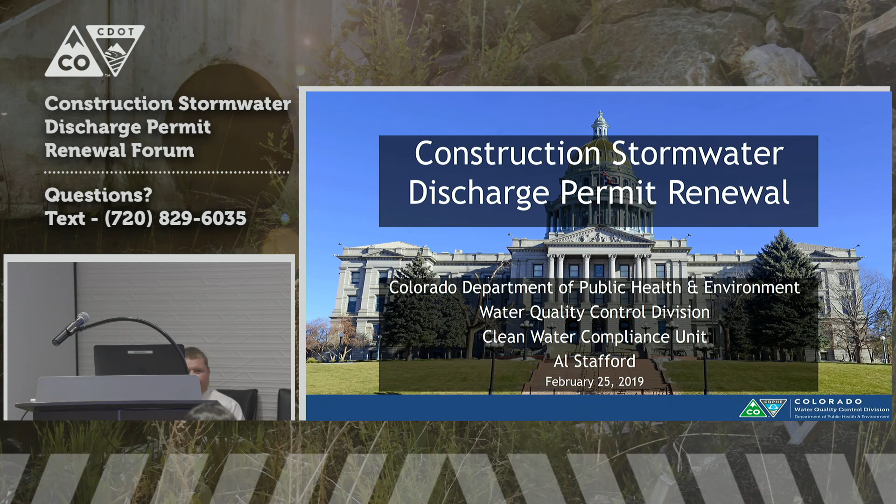Just really quickly, because this presentation is tailored to CDOT a little bit, I think it'd be really important to introduce some key roles in our construction program. So our newest addition is Laura Newman. I don't know if you want to wave... She is our MS4 program manager. Would that be the most appropriate title? Okay, cool. Construction program manager.

And then we have Paul Heffernan. Paul? He knew he was going to get introduced. Very well.

So Paul is our MS4 field, construction program field manager. He plays a key role, and he's going to be dealing a lot with the permit renewal as well. And then we have our water quality section manager, Jean Cordova. She is our subject matter expert. So along with those three wonderful people and Al, we can probably get through this process together. But I thought those introductions were important.

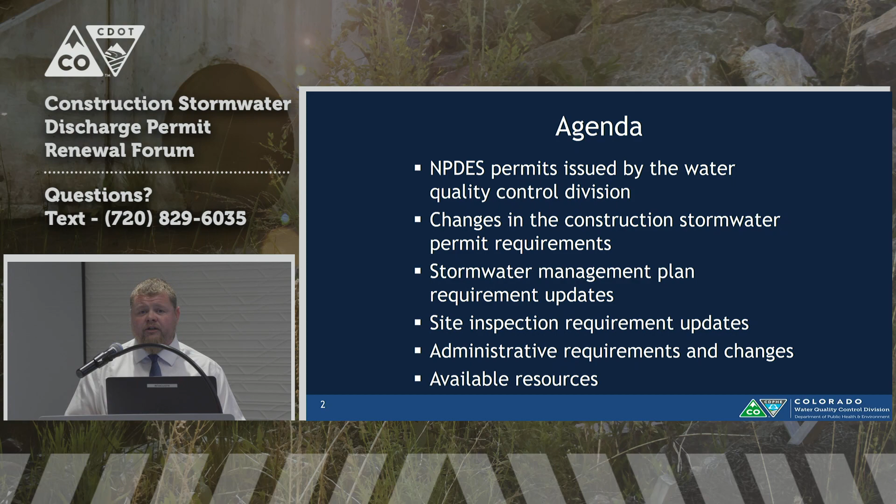So construction permits, what do we have here in the state? As you can see, our construction stormwater permit is by and large our largest permit throughout the entire CDPHE's permits, throughout the Water Quality Control Division's permits. Our next largest number of permits fall under our industrial stormwater permit, which only has about 1,000 permits. So you can see that construction stormwater permit is about 5-fold from even our next largest sector.

We have about 4,800 permits currently in the state under our construction stormwater permit, and we get about 2,400 applications per year. So you can see it's a large volume of permits coming in and out all the time. Also under our construction, though we won't be talking about it as much today, is our dewatering permit. We currently have about 250 of those, with about 230 applications coming in a year.

So those are definitely high turnover projects. They tend to only be when a site needs to dewater for a small amount of time. Our remediation permits tend to stick around a little bit longer. Those are typically down here in the Denver metro area. That's when your groundwater that you're having to pump out meets or exceeds certain water quality standards.

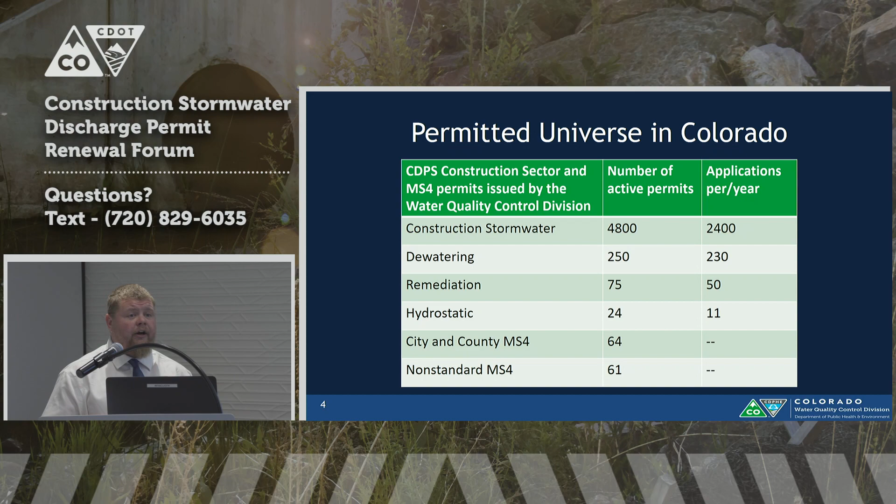We also have our city and county MS4s. We've got about 64 of those right now. That would be such as City of Denver, Weld County, things like that. And then also our non-standard MS4s, that would include CDOT, as well as our universities, things such as that.

So how do construction permits work? How do they work down the chain in the Water Quality Control Division? Well, we start out with our permit section. The permit section writes all of the permits and issues all the certifications that come underneath those permits. So they're the folks you deal with in the application process, modifications, transfers, things such as that. That all falls underneath our permit section.

Then, once the permit's issued, we move on over to our compliance and enforcement section. Now this is actually broken down into two different groups so that we always have a check and balance between compliance and enforcement - there's always other folks looking at these inspection reports. So the compliance unit, which is what I'm a part of, the Clean Water Compliance Unit, we conduct inspections throughout the state and also do assistance in education, such as this project here, and help out with trainings at Red Rocks Community College, and also give a number of presentations when they're requested throughout the year.

We currently have about 9 FTE, and about 80% of that is dedicated to construction. So you can see that we have a large percentage that we really do focus on construction. Part of that is because of the large number of permits, and then also because of our alternative compliance strategy, where we actually have a 10% oversight for the construction sector, whereas many of our other sectors have more of a 2 to 3% oversight.

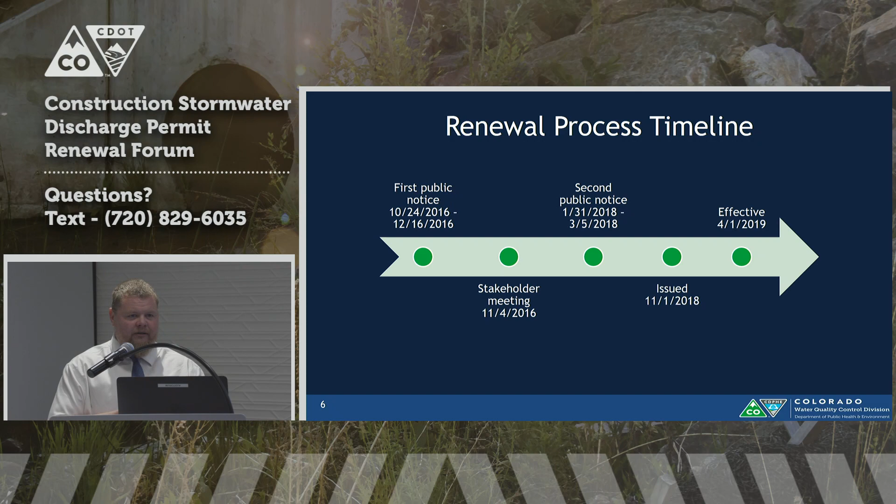Just to take a look at the overall goal of the permit, here's the big thing. The overall goal of the permit hasn't changed. At the end of the day, we're still making sure that we protect our pollutant sources that are associated with construction activity and make sure that we're not discharging pollutants off-site.

We're doing that via stormwater management plan, doing it via practice-based effluent limitations. So instead of taking a sample and having numeric effluent limitations like we do for our dewatering, instead we're using practice-based effluent limitations. So it's practices that we need to do on site.

And so at the end of the day, that hasn't changed. We're still doing the same thing. We're still going to be using silt fence. We're still going to use straw wattle. At the end of the day, management of the site has not changed.

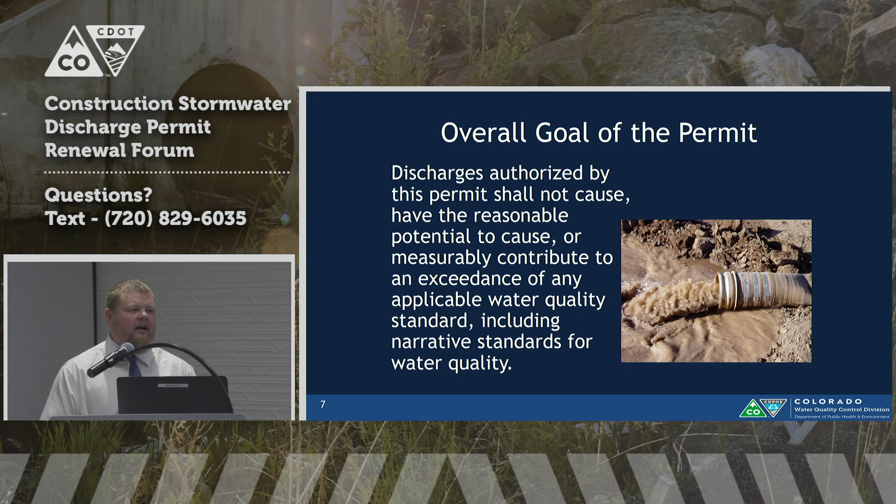So let's talk about now what has changed. A few comprehensive changes to talk about first off. First of all, there is a new permit number, so new permit ID.

That means that everyone will get a new certification, and your certification number, instead of starting with COR 03, will now start with COR 40. The only thing there is we ran out of numbers. There was too much construction.

There is a reformatting of the permit. So you'll see as you read through it—I guess I should ask instead: has anyone read the permit? The new permit? A handful? Excellent, that's better than I've seen at my other trainings.

Way to go, CDOT. So you'll see there's a bit of a reformatting in the permit, trying to get it a little more comprehensive, a little more understandable, putting the requirements that go together. There used to be 4 different places, 5 different places where it talked about concrete washout. Now all of that is in one location.

We've also gone ahead and removed any duplicative requirements. The main one here is going to be our discharges to construction dewatering discharges to the ground. And we'll talk about that in just a couple slides here.

Also, we're making sure, like I was talking about, we're incorporating all those federal effluent limitation guidelines, those ELGs, those things from the EPA that we have to put into our permit.

You'll also notice a terminology change. So where we used to see BMP, or best management practice, now we're using the term control measure. Control measure is kind of a larger umbrella term for BMP. It really makes sure that it includes all of the various ways that we manage stormwater on site—so our scheduling, our education training, as well as our kind of traditional structural control measures.

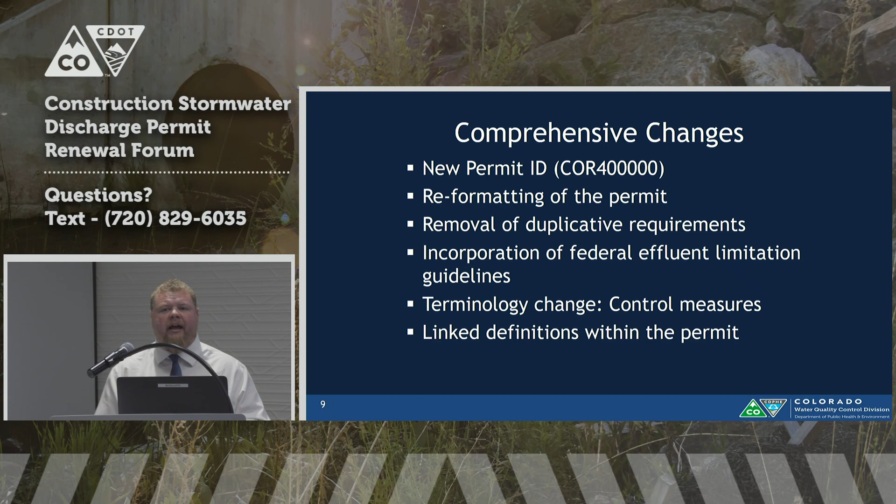Last thing to note here too, this is just kind of neat. So if you're reading through the permit on a computer, the first time that any of our main definitions come up, they'll be in blue text, and you can click on those and it'll pop you down to the glossary for the permit, which is just super helpful, not having to shuffle back and forth. New technology.

So at the end of the day, coverage under the permit hasn't really changed. We're still covering construction activity under the permit. We're still covering those support activities, your borrow and fill sites that are associated with that facility, the dedicated asphalt and concrete batch plants that are associated with that facility.

We've also made sure now to include our masonry mixing sites, which have always been included more or less. They are known pollutant sources on construction sites. It just wasn't specified in the permit previously, so it's really just for clarity there.

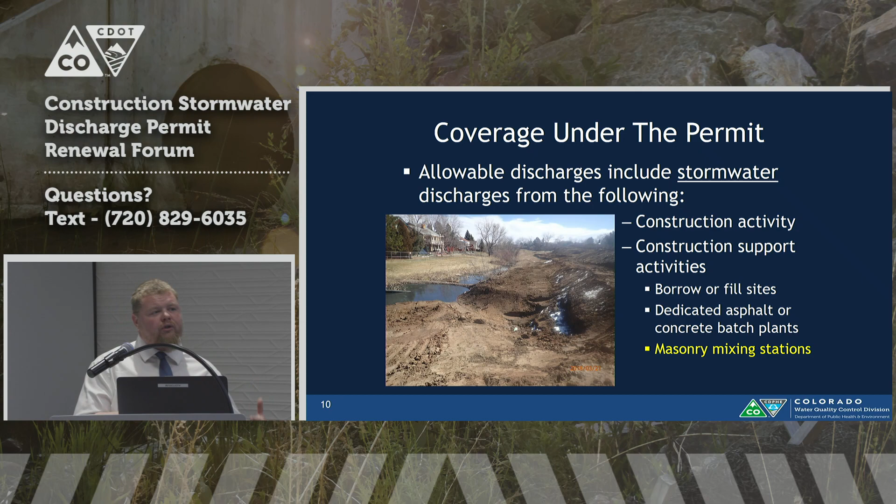Keep in mind too that this also includes all of our construction at oil and gas operations. They do fall under our construction permit during that construction period, and then also includes various mines or other industrial facilities that are having construction occurring outside of their typical industrial activity. Let's say a sand and gravel mine is having a new weigh station put in—that would, if it fell under over an acre of disturbance, need both a sand and gravel permit and a construction stormwater permit.

So for control measure requirements, the big change here is our term 'minimize.' We are required to implement control measures, which we had to do before, but now we're going to be minimizing the discharge of pollutants from all potential pollutant sources. The idea here with the term minimize - we know we can't eliminate all sediment from leaving the site. There's always going to be some discharge from the site, so we want to minimize that discharge. And minimize, as you can see from the definition, means we reduce or eliminate to the extent achievable, with control measures that are technologically available and economically practicable in light of best industry practices.

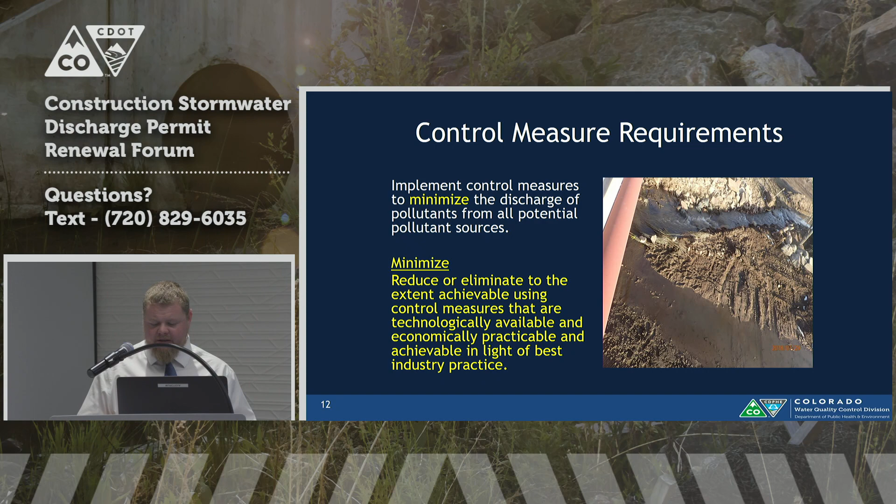So what sorts of things does that mean for construction sites for sediment? Well, it means our silt fence, erosion logs, sediment basins - these same control measures that we're seeing already out there in the field. That's what we use to minimize pollutant sources from construction sites, because that's our current industry best practice.

So from the top one here, this is the old familiar: control measures have to be selected, designed, installed, and maintained in accordance with good engineering, hydrologic, and pollution control practices. Same exact language from the previous permit.

Another thing here is that control measures need to be installed prior to the start of construction or disturbance. This really just provides clarity, right? We always knew we had to implement control measures prior to construction disturbance - otherwise we had construction without control measures, and that wasn't allowed previously. So we're just adding clarity there. We already know, too, in phasing, that we always included that in our phasing descriptions. We always said in our stormwater management plan that we were going to put in control measures prior to construction. Now we're just clarifying it in the permit.

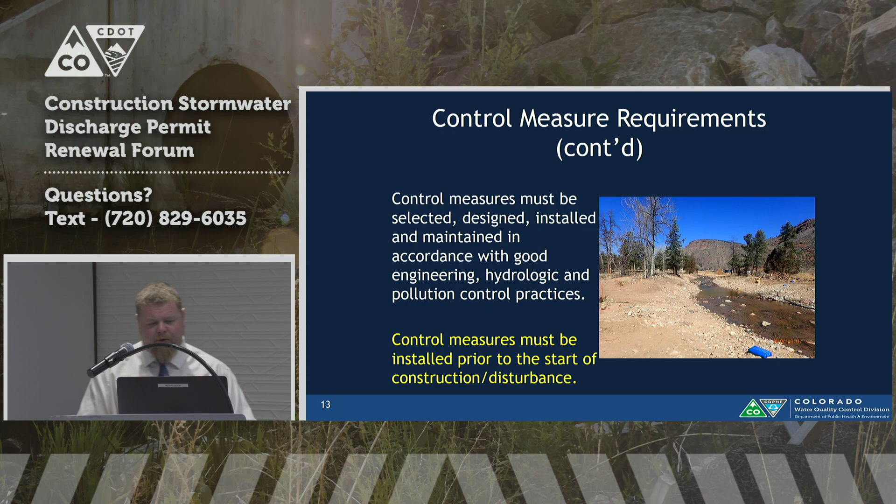A couple more requirements for control measures, specifically for erosion and sediment now. Stormwater runoff must flow to at least one control measure to minimize sediment. Again, this is clarification from previously - we said we have to implement control measures for all pollutant sources, now we're just saying they have to go to at least one control measure.

So our control measures have to be appropriate for the disturbed areas and for the expected flow conditions, and they need to be adequately sized. A couple examples here: first, inlet protection is not appropriate as the sole control measure because it has to be able to bypass - so inlet protection can't be our sole control measure because it's not appropriate. Another example would be our sediment basins - they need to be appropriately and adequately sized for all of the potential flow coming to that site.

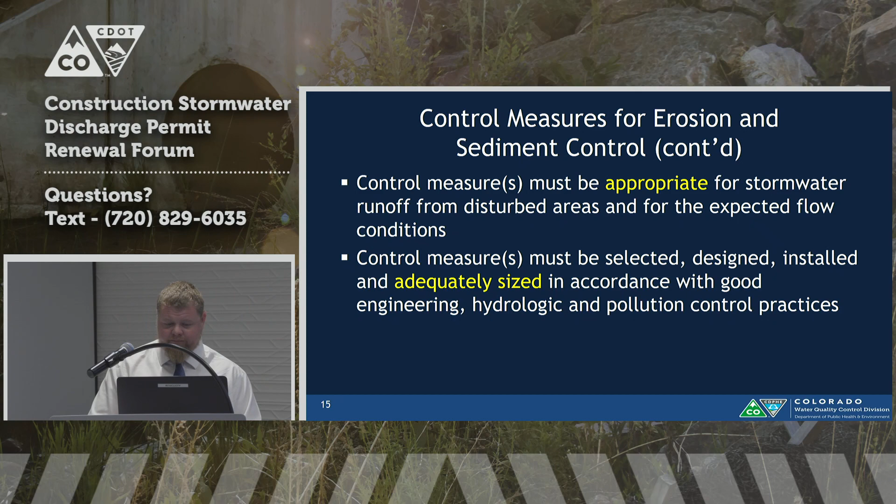Looking at vehicle tracking controls specifically, we already knew we had to implement vehicle tracking controls previously because it was part of our requirements for our stormwater management plan. So it's not actually a change in what we're doing on the site. We know we have to do this. Now it's just in the permit rather than just in our stormwater management plan.

One thing that is different here, though, is that we can ensure that areas where tracking does occur, it flows to one control measure instead of having a vehicle tracking control. So what this is saying here, the change that allows a little more flexibility in the sector, is that we actually can have some amount of tracking as long as it's coming back into a control measure.

Again, though, remember that inlet protection cannot be the sole control measure, including for that tracking. So perhaps it comes back into a lined ditch with check dams, that sort of thing. That's what we're looking at there. Inlet protection cannot be the sole control measure there.

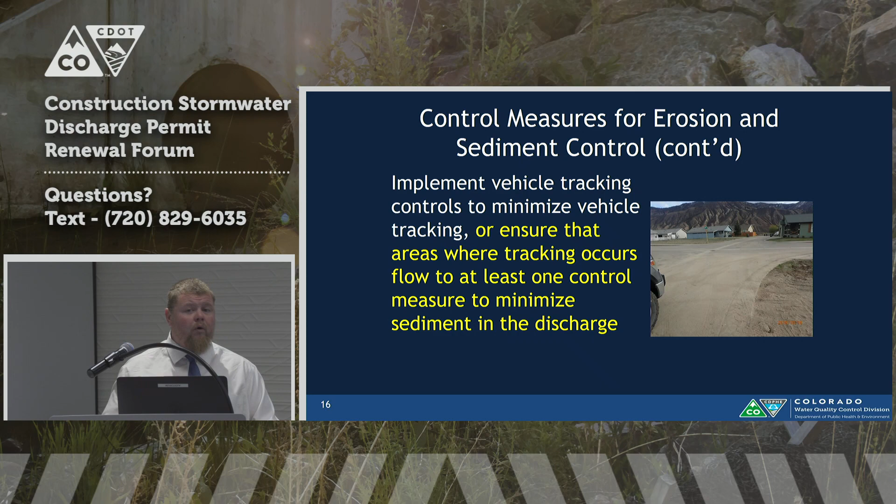Another requirement for our control measures for erosion and sediment control is that for sediment basins, we need to now make sure that our outlets withdraw water from at or near the surface when they're discharging from our basins, from our impoundments. And we'll talk about that word unless infeasible in a second here.

But what does that mean? What does that look like in the field? It could look like a skimmer. Could also look like a slotted riser pipe, perforated pipe, something like that. The idea is that we want that water to be able to build up so that the sediment settles to the bottom and we're not sucking out from the bottom of the basin.

Now again, no actual change here really, because previously we needed to make sure if we were using a sediment basin as our final control measure during the construction activity. We know that sediment basins, water quality ponds, don't need additional control measures once we don't have disturbance. But during the construction phase, we want to make sure that basin is somehow modified. So perhaps there was a concrete trickle pan down the middle of the basin.

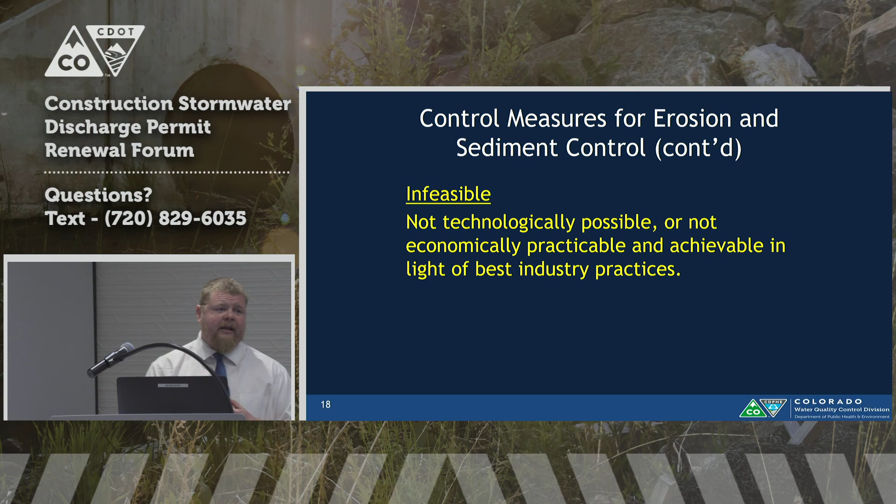So let's go back to this last example here with the skimmer. Now, if in order to have a skimmer, we need to have a generator, we need to have some sort of electricity going to that skimmer, well, in that case, that might not qualify as economically practical in this situation. And so in that particular sediment basin, maybe we want to see that slotted riser pipe or something like that.

Another one of our requirements now for erosion and sediment control is that we have to maintain pre-existing vegetation or equivalent control measures for 50 horizontal feet to the receiving waters. And again, we see that term unless infeasible. Now, this one came directly from the EPA. This is one of those ELGs from them that we were required to implement. Let's talk about what infeasible might mean in this situation. Let's say we're doing stream bank restoration from the 2013 flood.

Well, if we're intentionally disturbing the entire area down to the river, then it's not feasible to maintain that 50-foot buffer. Let's say that we have a site that's already existing today—they've already graded down to the river because this permit isn't active yet. Well, in that case, again, it's not feasible to grow that vegetation back.

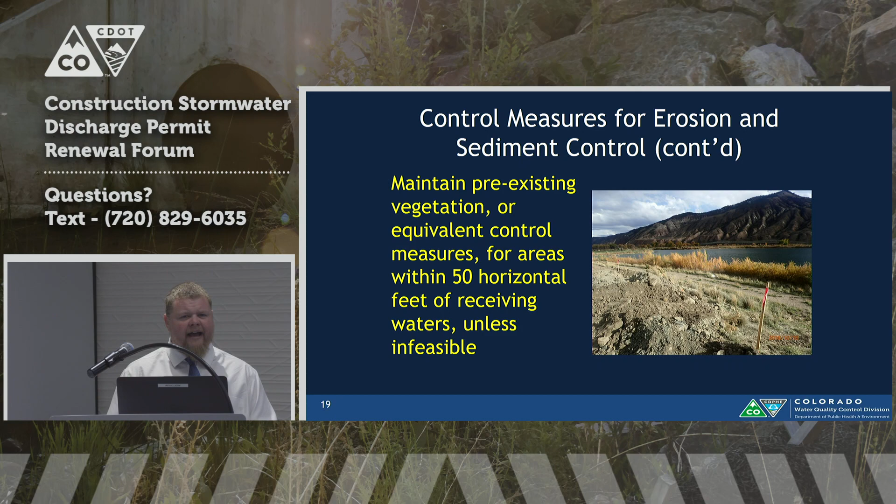It's already happened. It's kind of grandfathered in there. Another instance, let's say that we have a subdivision and we'd lose a certain amount of value if we're not able to grade closer than 50 feet to our receiving water. That might be able to be qualified as being infeasible.

Another one here is minimize soil compaction, where you're going to be using infiltration or where your final stabilization is going to be some sort of vegetation. This one really adds clarity. It is an EPA ELG that was required. It already made a lot of sense and was in a lot of stormwater management plans that we should reduce soil compaction, especially because if we were going to use infiltration and we compact that soil, we're not going to get that infiltration rate anymore. Now the soil's compacted, there's no space for that water to get in.

Also, we've always known that we want to minimize compaction when we're going to be using vegetation as our final stabilization, because if we compact that soil, that root system's not going to be able to get in there. We're not going to get as good a seeding as we would like.

So how do we minimize soil compaction? Well, we minimize site access where possible. So if we know that we're not going to be working in these lots over here or on this stretch of the highway over here for the next 10 days, then we know, okay, let's not drive on it while we don't have to drive on it.

Another one here, unless infeasible, you're going to preserve your topsoil for areas that are going to be vegetated for final stabilization. This was already a requirement, again, in a lot of stormwater management plans. COGCC requires it in the oil and gas field.

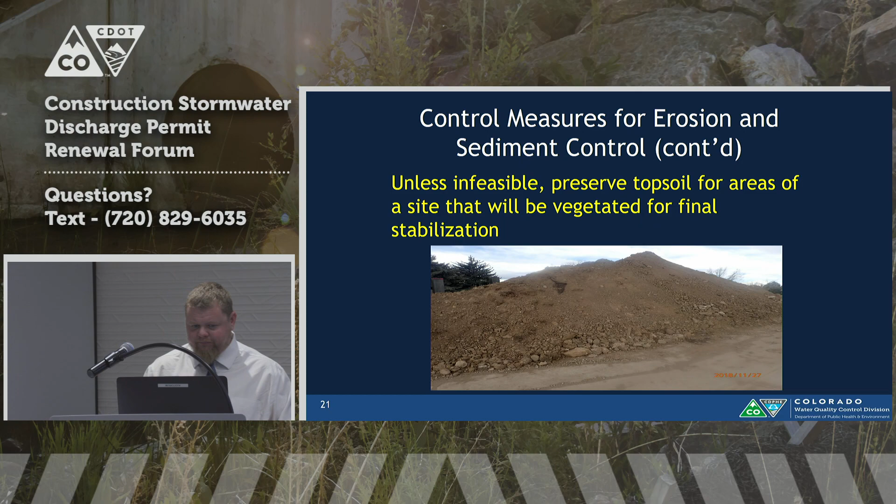Now, what would be infeasible in this situation? Well, let's say we're not going to use topsoil—well, in that case, it's infeasible to keep your topsoil around. Let's say that your topsoil is incredibly rocky or very, very sandy and isn't going to be able to grow the vegetation that you're going to need there. Well, in that case, again, it's infeasible to maintain that topsoil. And this is another one that came from those EPA ELGs.

This one here, I know that CDOT's made some changes to their specifications regarding the amount of soil that can be exposed at any time. I know that CDOT already has some requirements in the amount of acreage that you can have open, and that you need waivers for more of that. So this is in line with that idea there. Again, not really a new requirement—it was already something that was in the majority of stormwater management plans.

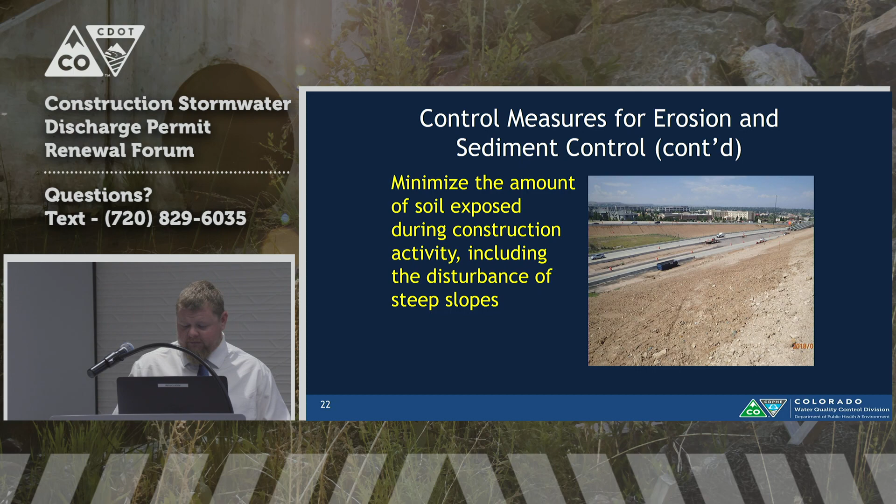How did it look? Well, it looked like phasing. We minimize the amount of disturbance by phasing that project, doing just pieces at a time, and that's going to include especially your steep slopes there. Now, if we're not able to implement phasing, then we're going to look to temporary stabilization. So if we can't break this up so that we're only working on sections in 2-week increments or so, that's when we're going to look into our temporary stabilization. We want to make sure that we're implementing that whenever construction has ceased for at least 14 days.

Tracking is another great temporary stabilization method. Now, some folks say, wait, but you said we can't compact the soil. Well, running a track over at one time is still in line with minimizing your compaction. Another option there would be your surface roughening—grooving, tracking, disking, things like that.

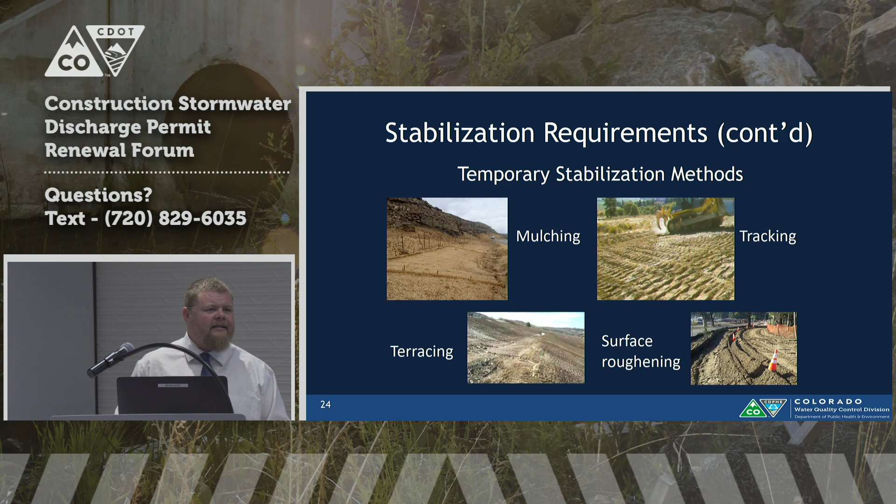Now, getting away from our temporary stabilization over into our final stabilization. Final stabilization has to be installed and designed as a permanent feature. That might be your riprap channels, things like that.

Also, think about rather than a temporary seed mix, which often results in quite a few weeds, we're looking for a permanent seed mix. So more of that native seed mix, what's really going to stay there and last.

Another requirement is we want to make sure we remove all our temporary control measures unless otherwise specified. Obviously, our erosion control blankets, we're not going to rip those out. The point is for the vegetation to grow through those. But we're talking about silt fence, and really that was already a requirement in the permit previously because we only wanted to implement the control measures that were doing something in the field. Otherwise, we needed to be taking those out because we run into waste management issues.

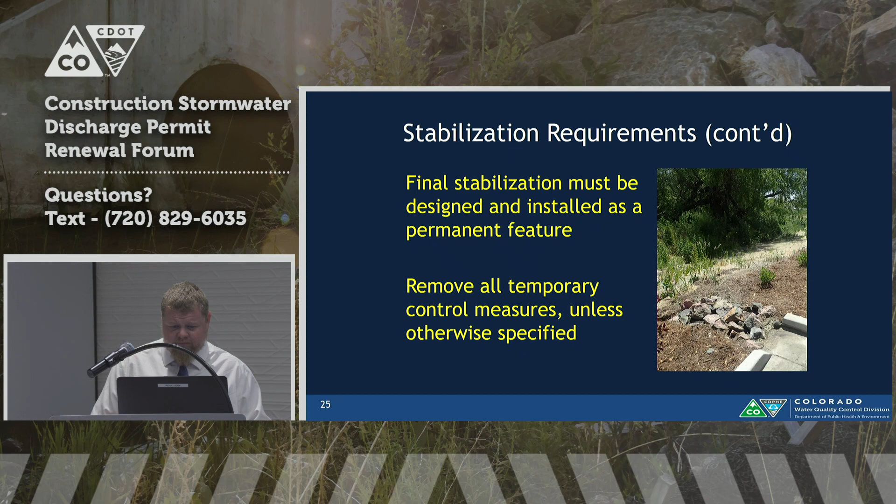Now, our concrete washout areas, this part here hasn't changed at all. We have to implement control measures for concrete washout, and we can't let that concrete washout get to any of our runoff or our receiving waters. So we can't discharge that as stormwater. Now, we can still discharge concrete washout to the ground.

And the previous permit really just said that we had to prevent pollution of groundwater. Wasn't very clear in exactly what that meant. So the renewal here, we have a little more clarity. Discharges have to flow through soil that has a buffering capacity prior to reaching that groundwater.

Now, do we have a definition for buffering capacity? No. I think about it as if you're in a cobbly, sandy soil, that's not going to have as good a buffering capacity as you would in something more loamy. But overall, it's a judgment call.

Concrete washout shall not be located where there's shallow groundwater. Are we defining shallow groundwater? No. But think about it again from a common sense. It's really the same as the previous permit. You know that if you went out there to dig your concrete washout pit 4 feet deep and you hit groundwater, that's shallow groundwater. If you know that you're right next to wetlands or a stream, chances are you have shallow groundwater.

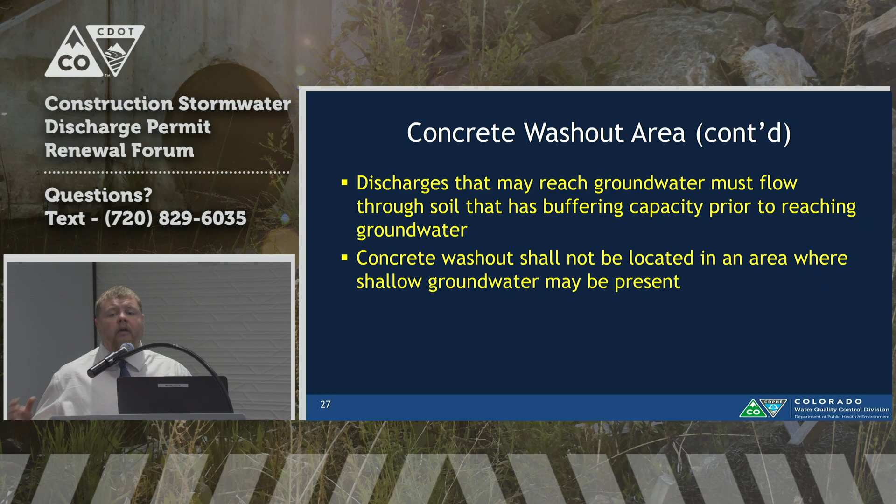You're going to want to move that concrete washout further away. So again, previously we said you had to protect groundwater. Again, now we're just defining a little bit more what that really means.

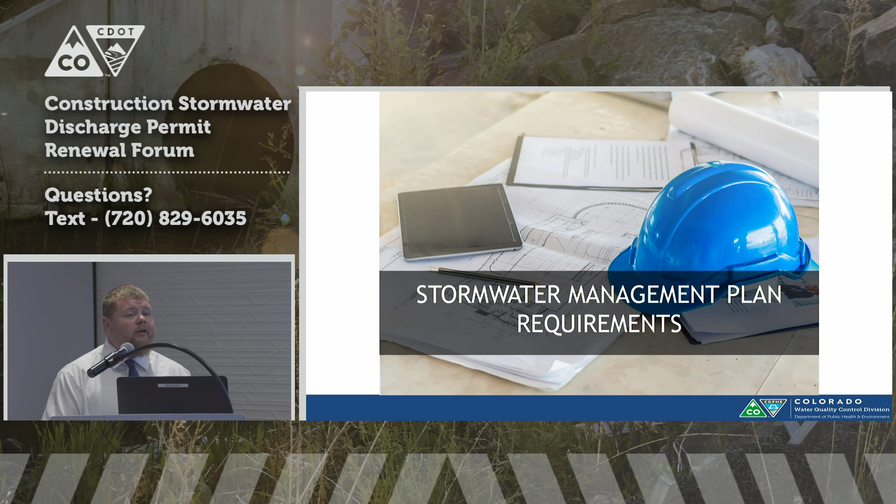So those are our control measure requirements, our practice-based effluent limits that are in the permit. Now we're going to take a look at the documentation. So there's only really a few changes that we have to the stormwater management plan requirements.

First of all, before we get into those changes too much, this is still a living document. We still want it to be maintained, kept up to date. It should reflect exactly the current field conditions. Now we want you also to maintain a record of those changes, and that's going to include a date and the identification of what that change is.

There's two different ways you can do this. The first would be to keep some sort of log in the back of your stormwater management plan. Write down what the change is and the date that that change occurred, and then keep that current stormwater management plan in your book.

The second way would be kind of what we typically see in the field, which is just going through and redlining. But now you're going to add a date to when those red lines occurred. That's how we're going to make sure we know kind of a documentation of the maintenance of this book.

Same as previously, though somewhat misunderstood, the plan does need to be retained on site. If you're unable to retain the plan on site, let's say construction occurred 3 years ago and you're still waiting for the grass to grow out in Rangely, then in that case, that stormwater management plan might not have a place to live on site, but it could live at the local maintenance office.

And so what you just need to do there is get in touch with somebody from water quality, one of the inspectors, one of the permit writers in construction sector, and just have them ask for permission to keep it off site, and we'll send you back a quick authorization, just an email saying that's all set, we'll add this to your file. But we do need that plan to be maintained on site unless you have that written authorization.

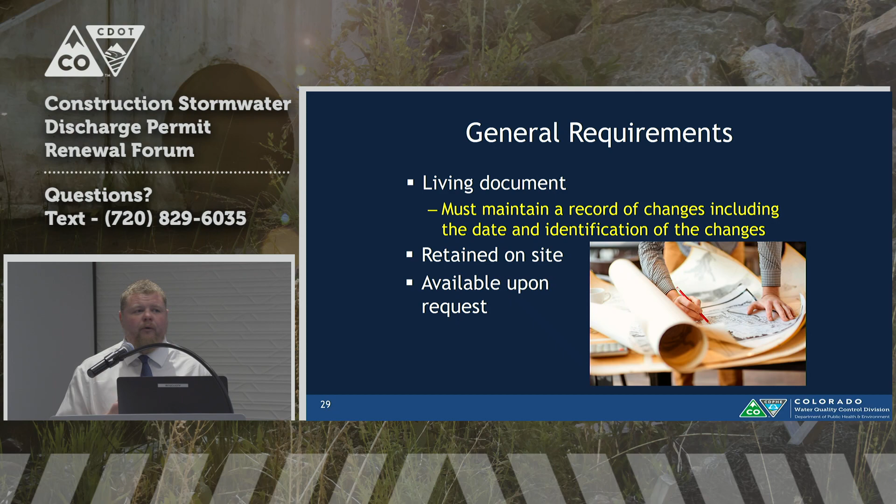And of course, same as before, that plan needs to be available on request. Typically, that would be for inspections, both MS4 inspections as well as the state ones.

So our required content, not too much change right here.

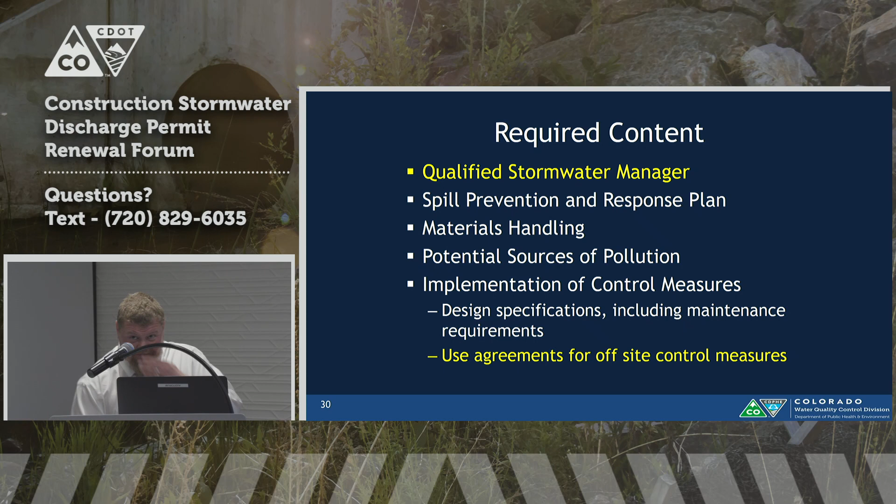One thing that looks very different, but hasn't actually changed, is our qualified stormwater manager. This previously used to be called our stormwater management plan administrator—it's the same idea here. All we're saying is that the person needs to be somewhat knowledgeable in construction stormwater. We're not defining what knowledgeable means, we're not requiring any trainings, we're not saying you have to go to this training or that training. But we are expecting that person has an understanding of how stormwater works and is able to analyze how stormwater management is working in the field, which is essentially what that stormwater management plan administrator previously had to be required to do.

Nothing new with our spill prevention, materials handling—of course we want to list out those potential sources of pollution. When it comes to implementation of control measures, we look at our design specs, including maintenance requirements and descriptions. We also now want a use agreement whenever you have an off-site control measure. Let's say we've got a subdivision with 6 builders all going to the same sediment basin—you'd want a use agreement with whoever's maintaining that basin. Same thing if we've got an inlet down the next intersection from our bridge project—you'd want some sort of use agreement if you're not the permittee taking care of that control measure.

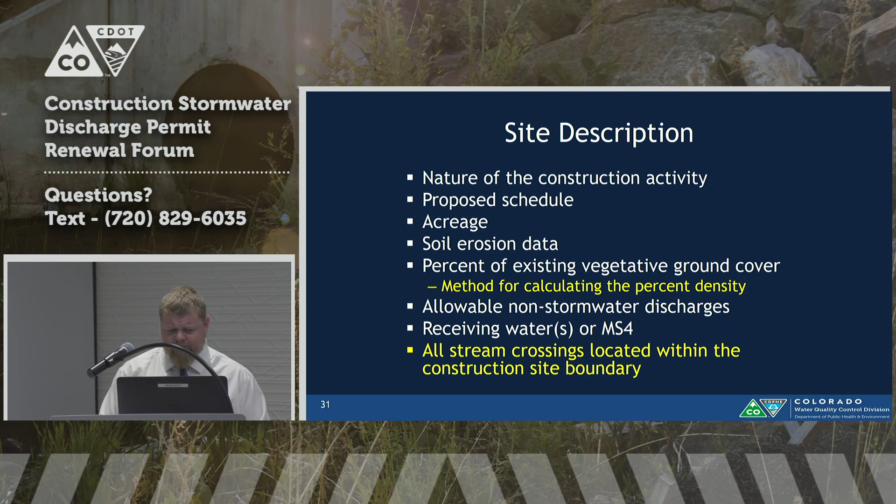On our site map, again, not a lot of updates or changes here. A couple new things—some of these we're already seeing in a lot of our CDOT plans anyway. Flow arrows—we want to get our flow arrows on our maps to give us a better idea of how stormwater is moving on site.

Kind of skipping down to the other changes here—in addition to having all of our waters, our springs, our streams, our wetlands, and labeling where those are, we also want to show any area where we're maintaining that 50-foot setback from construction to the stream. Remember we had talked about that requirement for the EPA—we also want to indicate where that is on our map.

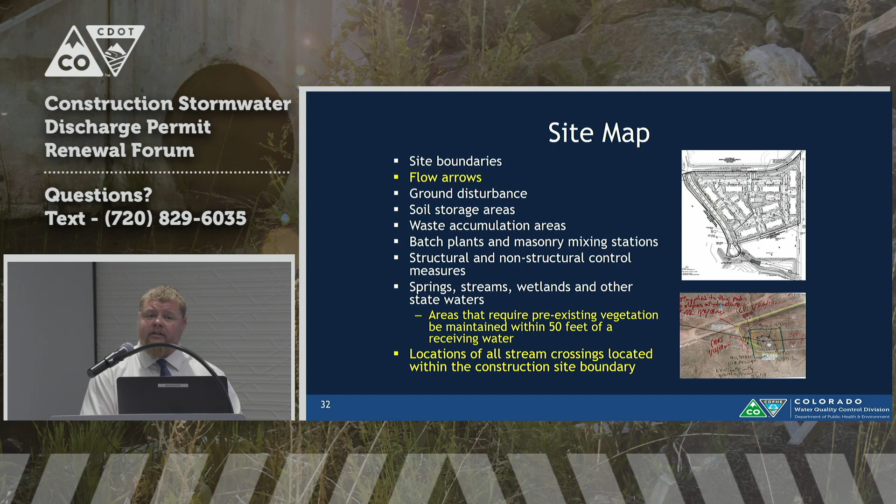We also talked in our narrative about wanting a description of our stream crossings—we're also going to label where those are on our map. The thing about stream crossings and why that's in the permit now is those are really our crucial locations, right? That's where our construction comes right up to the river. We know there's a high potential for discharge without adequate control measures in those locations, so we really want to draw attention to those locations and focus on them in our inspections and in our management of water on the site.

Also within our stormwater management plan, we're going to list out what we're using for final stabilization—we've always had to do that. Always make sure you have your seed mix in there, whatever that's going to be, and it's best to have some sort of percentage in the actual seed mix. If you know it's going to be a native seed mix, maybe include some examples of what might be used in your plan.

As a new addition to the plan, we also want to see the plan practices that are going to be used after construction is completed. So here we're talking about permanent riprap channels, sediment basins that are now water quality ponds, things such as that—that wasn't a requirement of the permit previously. You used to be able to just say basically how you were going to achieve vegetation or non-disturbance. Now we also want to know how stormwater is going to work permanently on the site.

So now we'll switch over to our site inspections. A couple of really great changes in here for sure.

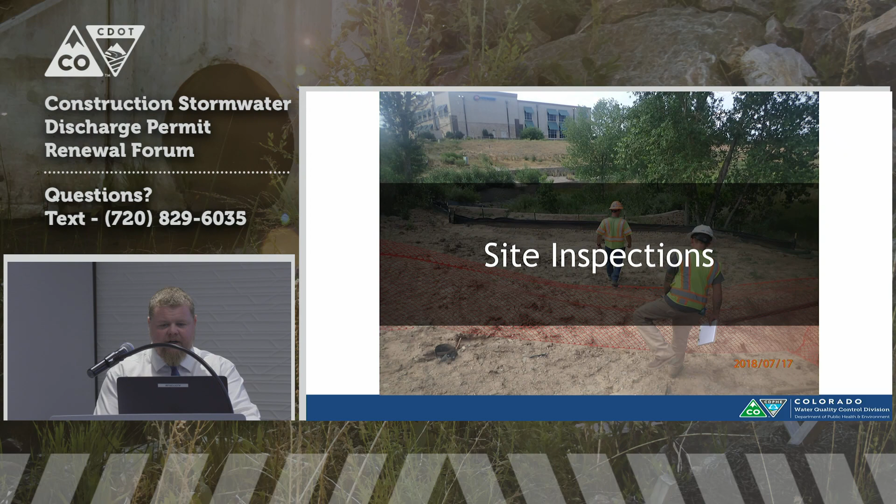One thing is we want to make sure inspections are conducted by a qualified stormwater manager. Now you can have multiple qualified stormwater managers for one site. It can be a title or a person, but you do want a qualified stormwater manager conducting those inspections. This is someone knowledgeable in stormwater, so it makes sense that you'd want someone who knows what they're looking at to be conducting the inspections.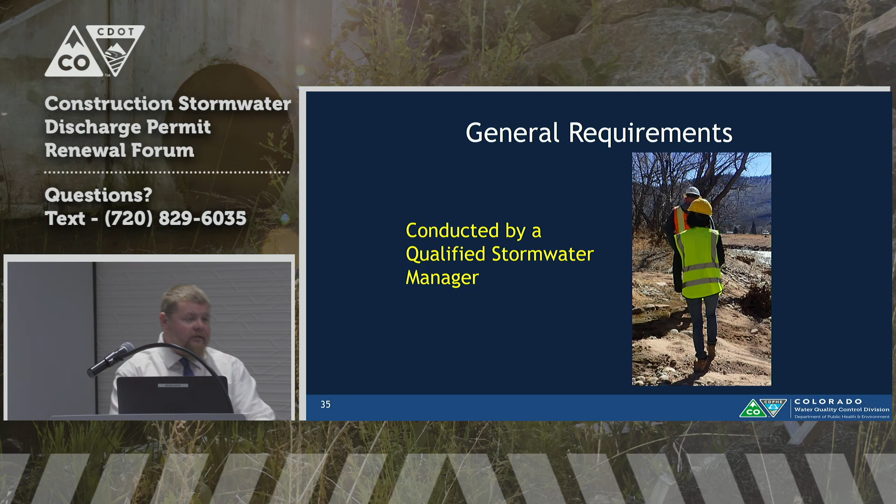One change here is some clarification: the previous permit didn't say when inspections needed to begin on site. Now we're saying you need to start them within the first 7 days. Remember that installing control measures is a form of construction activity, and there's some form of disturbance that occurs. So once we have control measures on site, within those first 7 days, or once construction activity begins - if you began before control measures, which you shouldn't have - you want to start inspections within those first 7 days.

Here's one of the exciting changes in the permit that adds a lot of flexibility. We now have different options for inspection frequency. Our first option, which is new, is that you can conduct site inspections every 7 days and not conduct any post-storm inspections. So that's option one: one inspection every 7 days, no post-storm.

That might work really well in a location where it rains a lot, or if you know you have 20, 30, 40 different sites that you need to inspect and there's no way you can do that when it rains really hard. But if you can get them all on a weekly schedule, it's easier to maintain. So that gives you more flexibility there.

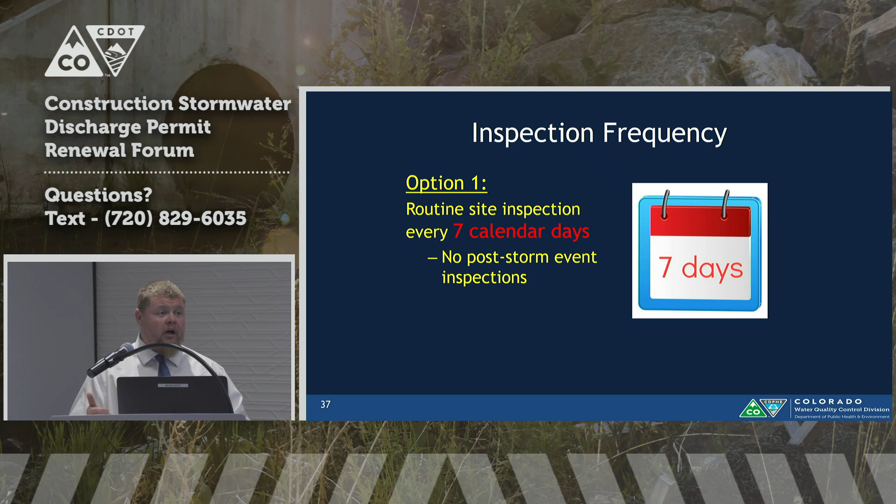Now remember, with our 7 days, stormwater doesn't take holidays, vacations, or weekends. Stormwater happens anytime, so 7 days is strictly 7 calendar days. If you know President's Day is coming up and you usually inspect on Mondays, you're going to want to shift things around to accommodate for that. They need to be at least every 7 days.

Now option number 2 - remember option 1 was 7 days, no post-storm - option 2 is what we currently have in the permit: an inspection every 14 days, plus post-storm inspections. This might work really well in the drier areas of the state, or if you know you have the manpower to get behind the storm events. So you can choose whichever option works best for your site.

You can also choose to go back and forth. Let's say during the rainy season you want to do 7-day inspections, and during the summer or drier season you do every 14 days plus post-storms. So you can make those options to go back and forth between the two. Lots of flexibility there.

Great question, and I'll get to your question back there in a second, Paul. What we will - and we'll see this in a minute - is you want to include that in your inspection records, but it doesn't need to be in your plan itself.

Question back there? Paul Heffernan, I was introduced earlier, I was in the room. Just so everyone knows, CDOT is not changing from 7 days with post-storm. We're not changing with these options. Thank you, Paul.

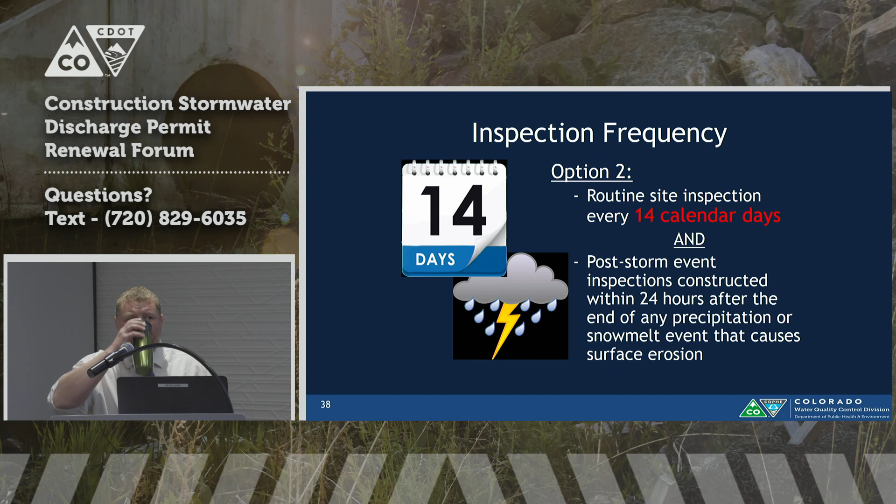That is a great question, and I do not.

Other questions on the inspection frequencies?

You can. You can. You just need to note it in your inspection records, and go forth.

What was that? I'm sorry? Sure, that would be something you'd have to work out between the MS4 and CDOT.

That's true, yep, that's true. And let's say you have one CDOT project and one that's not CDOT - you can do different things within your company too. Yep. Yeah. Yes. Yes. Thank you.

I'm sorry to folks online if you're probably not hearing these questions - my apologies, I will repeat the question. Other questions on the inspection frequency?

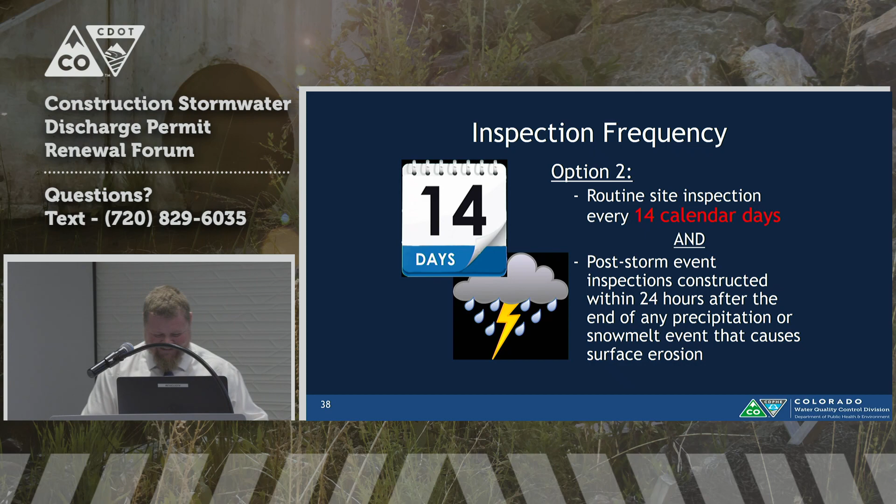Another change here in our inspection frequencies. So if you have a site that's discharging to outstanding waters, and you would know that from the fact sheet that comes with your certification, that site needs to conduct site inspections every 7 calendar days. So you're held to that 7-day schedule. No post-storms, but you are held to the 7-day schedule there.

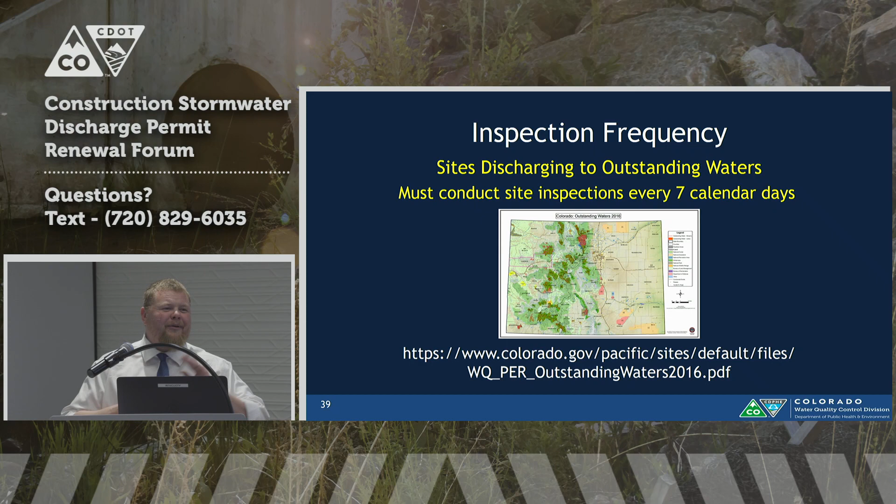And just to touch on that, outstanding waters - if you work primarily here in the metro area, there are none. They're all up in the mountains. They're pristine kind of headwater areas.

So a couple changes to our inspection reports. There's a few new requirements to include within your records. One is going to be your weather conditions at the time of the inspection. This can be real general - we don't need a whole meteorological evaluation of the site. Sunny, cloudy, snowing. Obviously if it's raining that's important to put in there. Snow melt, things like that. An approximate temperature - again, doesn't need to be to the nearest 10th degree. We're just talking approximate here.

We also want you to include your phase of construction. This, again, we aren't necessarily providing the various potential phases - it's really up to you to decide what that means for your site. Things such as active construction, grading, final stabilization, vertical construction, landscaping. Those are the sorts of things we're looking at here.

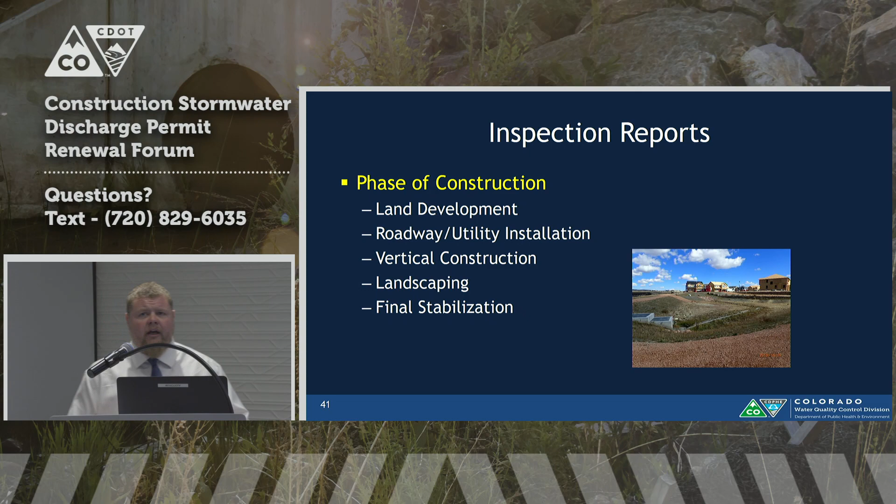We want to see an estimated acreage of disturbance - how much area is currently disturbed, not what you have on your permit, but the actual current disturbance. You're not going to include areas here that have been finally stabilized. So you would include if it's seeded but hasn't grown, if it has erosion control blanket, temporary stabilization, mulching, tracking, things like that. But we're not going to include paved areas, building foundations. Once we've got that road in, we're not going to include that.

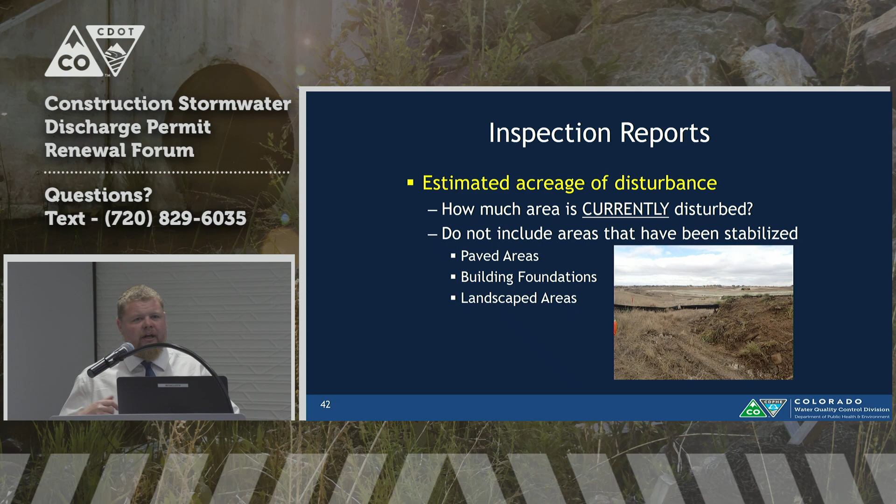And here's where we come back to that previous question. So we want a description of our minimum inspection frequency - whatever we're using at that time, we want to have that included on our records here. And then, same as before, if we're going to deviate from the minimum inspection schedule - our winter exclusion, final stabilization, where you pop down to 30 days - I'm not going to talk more about those since nothing's changed there. Those are exactly the same. So you still want to note that in your reports.

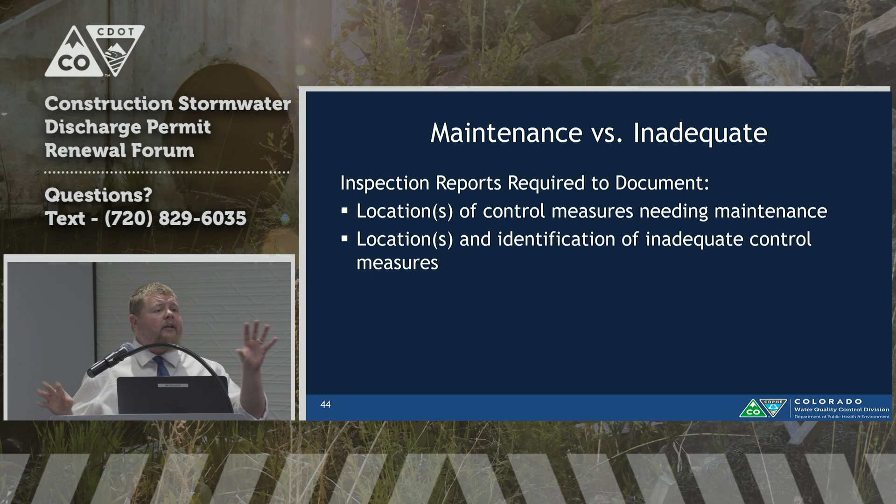So another couple things we need to see on our inspection reports, similar to before, is the location of control measures that need maintenance, and also the locations of inadequate control measures. The difference here - we always knew we needed locations of where we needed to perform corrective actions. Now we're breaking this into two different pieces: one is maintenance, and the other is inadequate control measures. So let's look at what that really means.

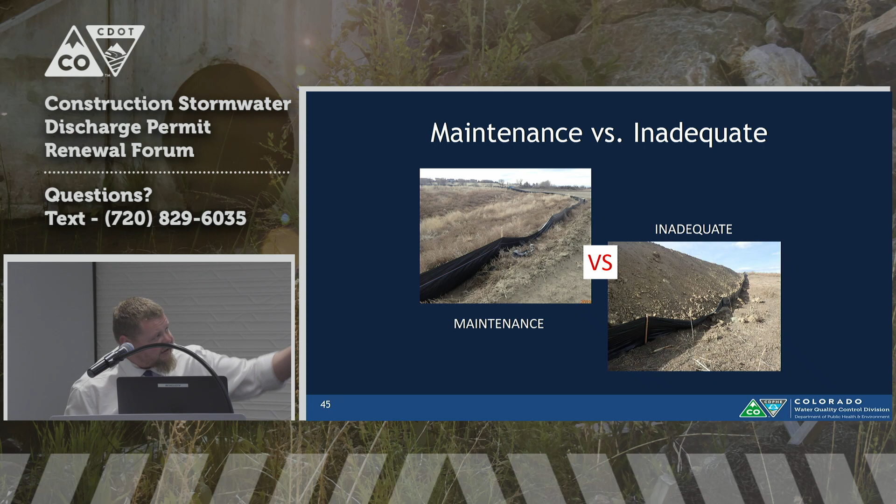So we can see over on one side, we've got our inadequate control measure. This silt fence probably isn't going to make it if we have a major rain event. It wasn't really installed correctly. We've definitely had a lot of slumping up against it. We can see some of the stakes might be broken. It's inadequate - it's not going to make it through the next storm.

Looking on the other side - and sorry, to go back to this - inadequate means it's no longer in good engineering, hydrologic, or pollution control practices. It's no longer installed in those categories correctly. It's not maintained, maybe it wasn't designed correctly. Silt fence might not be the best choice for us. We obviously didn't install it correctly either because we have no area from the toe. So think about that - good engineering, hydrologic, and pollution control practices.

Now on the flip side, we see maintenance. Okay, we've got some slumping here, but overall that silt fence is still going to do what it needs to do. We know we need to maintain it because our spec says you shouldn't have slumping, but it's going to do what it needs to do.

A little more detail on this because I want to make sure everyone sees the difference here. So maintenance - still operating in accordance with its design, still in good engineering, hydrologic, and pollution control practices, but it does require maintenance to prevent a breach, right? We know that if it were to rain over and over, at some point it's going to be too much, we need to do something to fix it. So the example here would be, now let's take our sediment control log.

Our specification says once we reach 50% capacity, half the height, we need to maintain it. So if we're talking about maintenance, that would be if it's less than half the height. Let's say it's 49% high. In that case, we need to dig it out, but if it were to rain again, we'd probably be okay because it's still within specification, which says it needs to be below half. But we also know we need to be preemptive here. We have to be proactive.

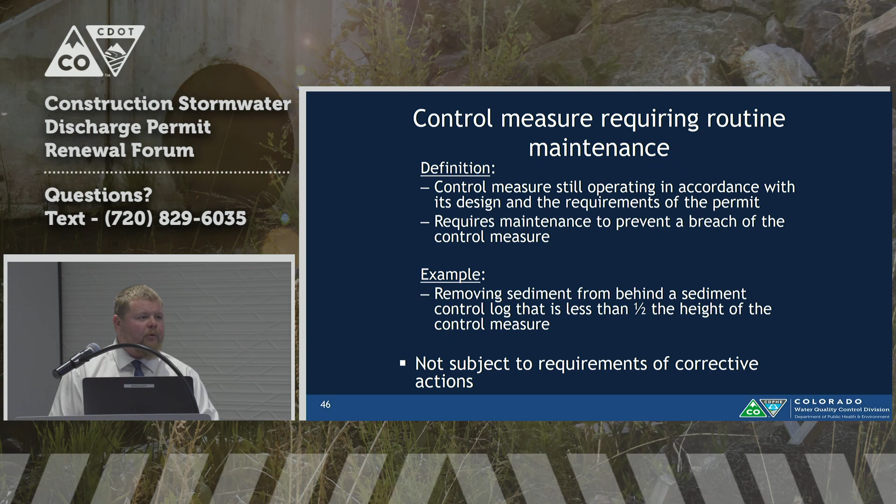Under the annual report, even though you don't have offsite discharges and your BMPs downstream of where you're looking are still functioning. You're being proactive and calling out for that. Well, I think if you're being proactive, then you fall under the maintenance criteria. Yeah, if it's a preemptive strike, a proactive approach, and you're not in danger, it's not inadequate, it's still in accordance with its design or with the permit. Now, the permit says we just need to keep it on site. Did that clarify? Yeah.

But when we're building something and we have limits of construction, but a fence, there's still, say, 20, 30, 40 feet of perimeter that's undisturbed grass. But it's still part of the overall site. Would that grass or vegetation be considered a control measure because it was pre-existing? And if we breached that, maybe a silt fence or erosion, but got past that, but we're still on the site.

So vegetation can't ever work as a sole control measure. And the reason is we don't know when to maintain it. And maintaining it is like raking, right? Bringing the sediment back on site. And so we don't have a specification that can tell us here's when to maintain vegetation, and here's how to do it without causing more disturbance.

It'd be best to maybe put something down at the bottom of the toe of that slope. Absolutely, so we're not disturbing it. And remember too, vegetation serves a great purpose by preventing erosion from what's right underneath it. It just can't catch anything from up gradient. Yeah, great question.

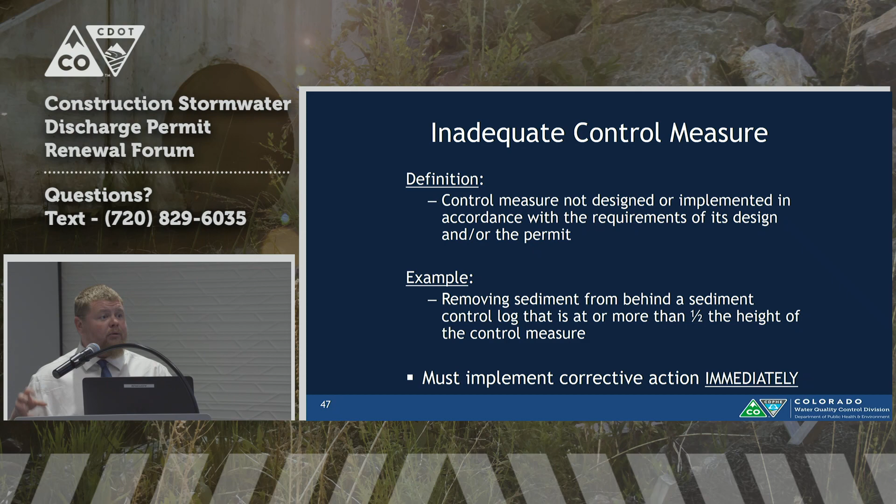So a couple of things about those corrective actions. Those corrective actions are when we have inadequate control measures. So this is when we're about to have a breach. Next storm, we'd have an issue, and we're no longer in those good engineering, hydrologic, and pollution control practices. So for those situations, the permittee is in non-compliance until it's replaced or corrected.

And if we know that it's going to take a bit of time, we want to put in some sort of interim control measure. Or if we know it's going to storm that night, and we know we can't get our new silt fence in until the next day, we need that interim control measure. Maybe it's a rock sock that we can lay down a lot easier. Maybe we're rerouting water somewhere else. But we want to stay in compliance with the permit.

A couple other things about those corrective actions. So corrective actions, if you can't do it immediately, what we want to do now is document why. Previously in the permit, we just said it needs to happen as soon as possible, immediately, in most cases. Now we're saying, well, if it can't happen immediately, let us know why. Document why. Keep a record of it.

And there's going to be two things you're going to document there. One is going to be, why is it infeasible? And it can't just be, well, you know, we're on vacation next week. It's got to be a legitimate reason why it is actually infeasible to correct that blowout or whatever the control measure is that it's inadequate.

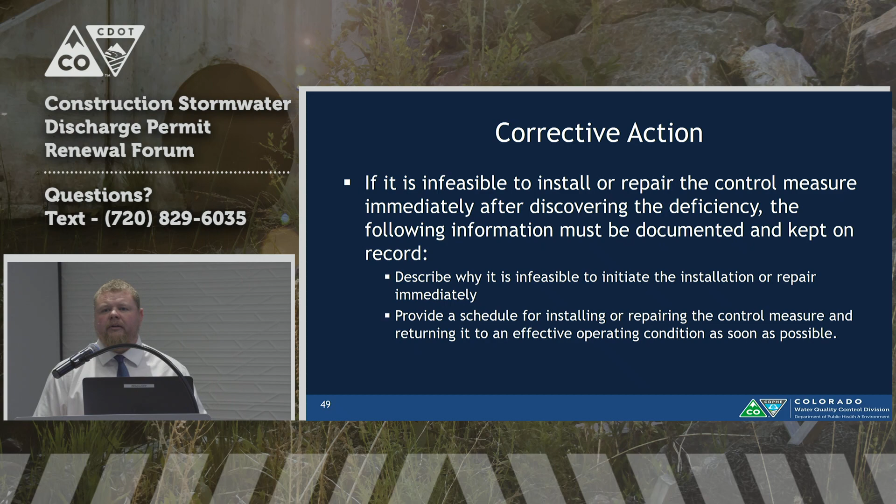So we want to describe why, and then also provide a schedule for when it's going to get fixed. So maybe we know that we've got new VTC rock, it's not going to, we're low in some particular county, down in Pueblo, let's say, so we need to wait until we've got a new shipment coming down there. Well, in that case, we want to document what that schedule is going to be in order to get that VTC fixed.

A couple other corrective actions - things you want to be doing immediately. You're going to clean up any contaminated surface. If we've got paint, concrete, asphalt millings, things that are truly contaminated, we want to be cleaning those up immediately. We're also going to remove and dispose of any unauthorized discharges, like sediment that's made its way into the creek, or unauthorized non-stormwater like oil or gas. Obviously you need to remove it as much as possible.

We know that if we've got a river that's cooking along, we'll never be able to recover it all, but the idea is to get what you can.

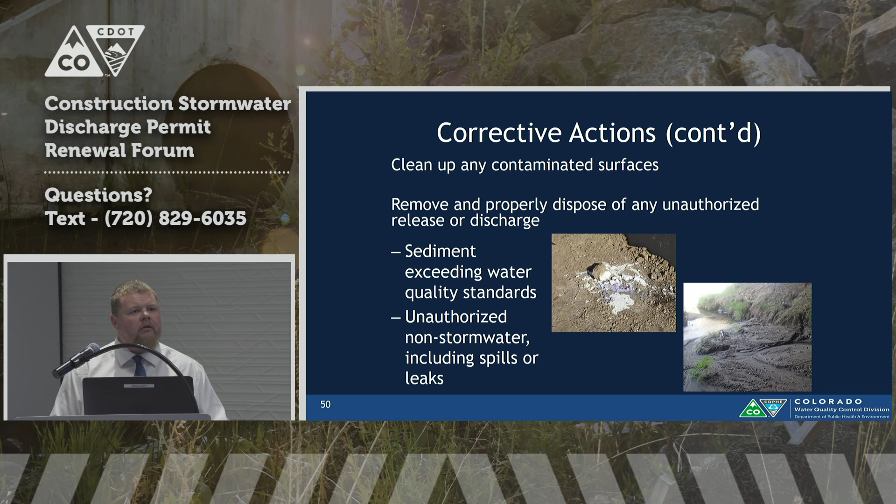Moving on now to our administrative requirements and changes - how the overall permit's going to work here. Application requirements are the same as before: we want that application in 10 days before construction activities begin. We have added some flexibility to the permit here, especially given the large number of fires, tornadoes, floods, all that fun stuff we get here in Colorado.

Public emergency sites - construction directly related to public emergency situations - can apply for a permit up to 14 days after construction activity has begun. So if we need to get in there and fix a bridge that got blown out, we can get right in there and get started on that.

I assume, like last year, we had a situation where up in the Lake Christine fire area, we had to get crews out there to start repairing transmission lines, but I couldn't safely get people in. I did notify Nathan that we were getting in there.

I suppose so. The 14 days really is in there to give that extra time, and remember, it's 14 days after. Well, but if they can't safely get in there, then they're not doing any construction, right? Depending on where, they had to shut stuff down.

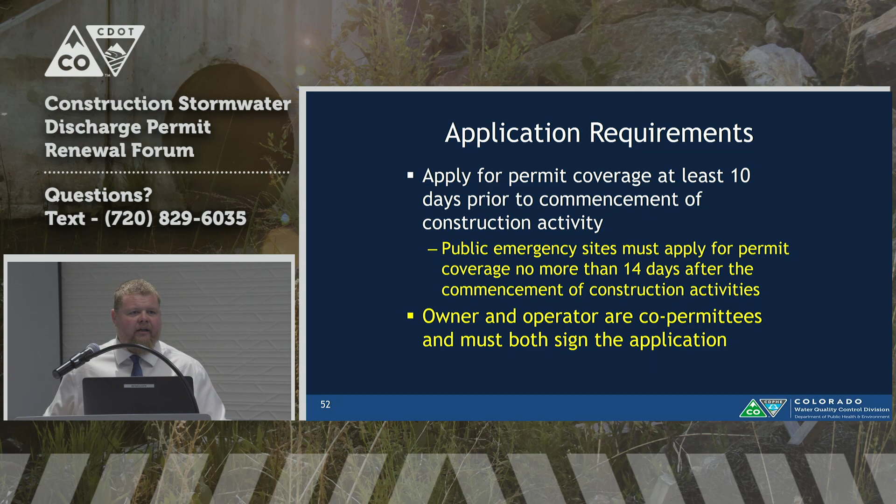So what does that look like for CDOT specifically? In this situation, the owner is the person who has overall control of the activity. The big piece here is funding - who, not just how much, not like we're going to take out silt fence here and add straw wattle here and use funds here. It's, we're going to have this much amount for stormwater. We're looking at larger funding - who's really determining how much money is available for the project.

The second piece here is we want the party that has ownership, a long-term lease, or easements.

How does this work with existing permits? Great question - we'll touch on this further. Essentially, existing permits are grandfathered in. So if you currently only have an operator on your permit, that still continues to be fine. Now, one issue that may come up - if you need to submit a modification, I'm not sure how that's going to look yet, as that has to do with the online application. But yes, essentially, projects are grandfathered.

So we reference easements in this section. Easements are on private property? Yes. What if your project is in right-of-way, which is public? Absolutely - counties and CDOT are not going to want to be a co-permittee with Xcel Energy for a utility project they have nothing to do with. Can we maybe talk after on that particular point? Yeah, it's a good point.

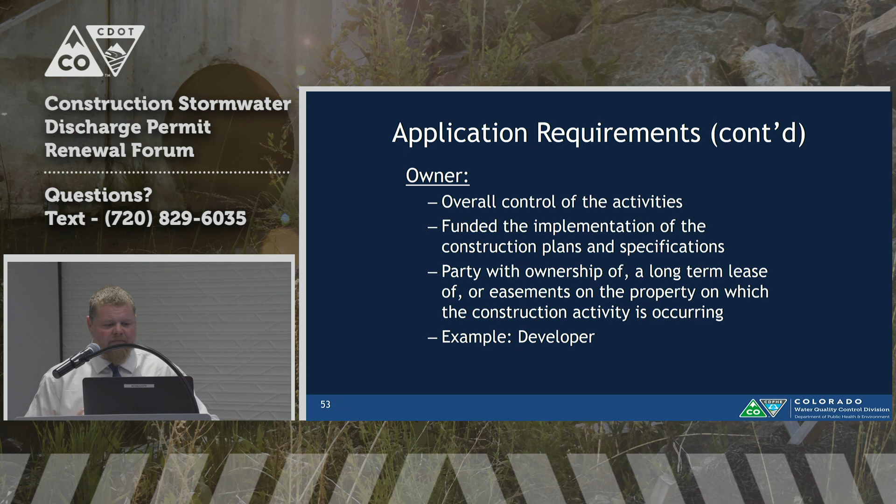The other thing to think about here is that it's the owner of the activity. That might make it a little better. So the question was, what about when we're in the right-of-way? For example, is Xcel going to need to be co-permittee with CDOT for CDOT right-of-way? I think funding is the piece to come back to.

So looking on the other side then, the operator, that's the person who has operational control over day-to-day activities. They can tell people how to meet the requirements of the permit, but they don't necessarily have the money power to say how that's going to be overall done, where the funding is coming from. So that's what we're really going back to here.

Remember that the owner can be both the owner and the operator, but an operator will always need an owner. I'll say that one more time: the operator will always need an owner, but the owner can be both the owner and the operator.

So for CDOT projects that are now in maintenance phase, so the contractor's moved away, CDOT could be the owner and operator. During an active construction phase, we'd have CDOT as the owner, and then we'd have the GC as the operator.

All right, before we move on, are there other questions on owner-operator? Yeah, so the GC could be the owner and the permit holder, so he's the owner and the operator. So the question is, can the GC be the owner and the operator? And yes, as long as you have the money and the authority on the property.

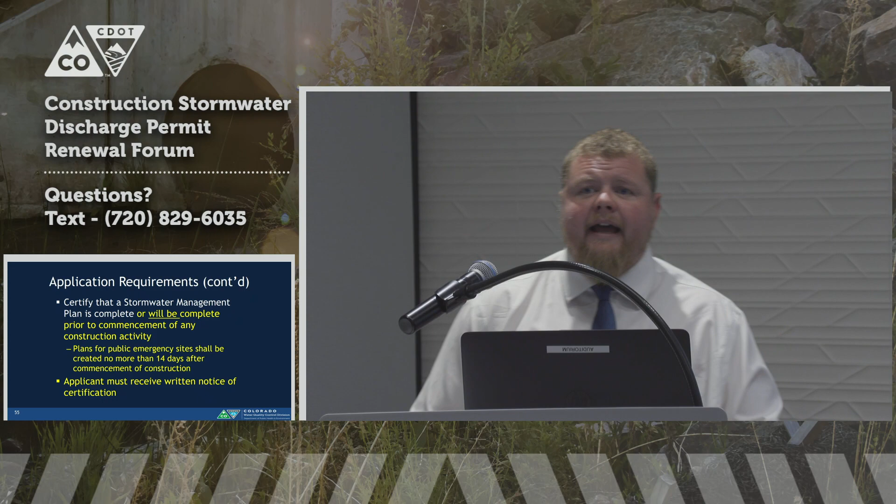Another change is that you need to make sure you get written notice of your certification. Previously, if you didn't get written notice and it had been at least 10 days, you could assume you were authorized. Now that we're using this online system, you'll get written notice via email that your certification is ready, and that will be your written notification. If it's been 10 days and you don't get written notification, that's when you want to call our permits unit and find out what's going on.

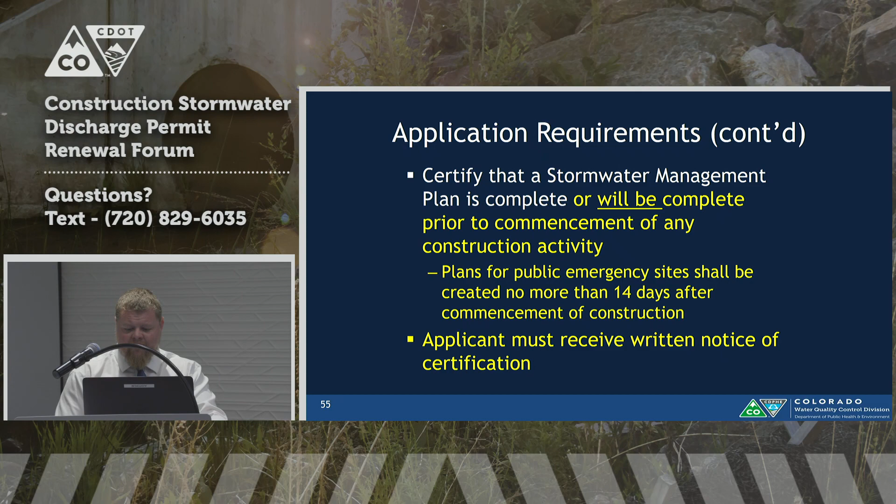Just to go over signature requirements a little bit. We talked about the application, and on that we need the owner and operator. Now here's where there's some ability to delegate signatures. Our self-inspection reports can be signed by our qualified stormwater manager, or any of the qualified stormwater managers on our site, as well as that attachment A. That's the one you see if you've had a state inspection with one of us. It's basically the legal document saying this is our stormwater management plan that we're using. The copy we give you is the same, so we don't need the VP or the Parks and Rec director to sign off on those.

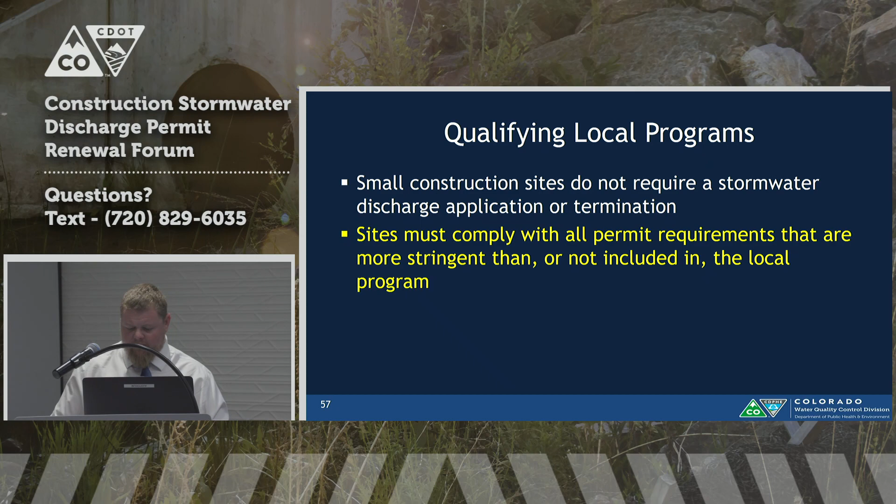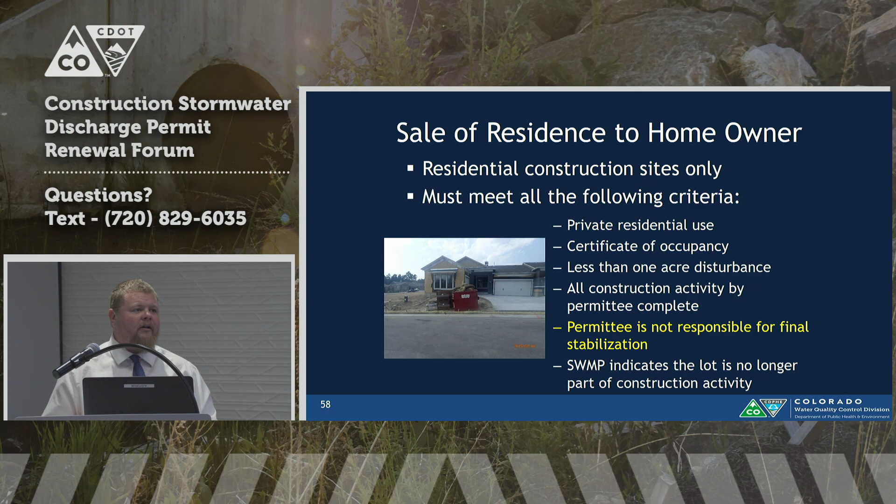Sale of residence to homeowner, really things haven't changed much here. This isn't necessarily for CDOT folks, you guys don't build too many houses out on the highways, so this is just our residential construction sites. Again, the only change is if the permittee was responsible for either front or back of lot, and one hasn't occurred yet, then that permit needs to stay open for that site until stabilization's done. So it only qualifies if the permittee is not responsible for final stabilization.

Transfer permit coverage, this is kind of a neat one here. We added some flexibility in this for sure. Previously, if you wanted to transfer a permit, let's say you were just grading the site, and the next GC coming in needs to take over, but they refused to take ownership of that permit even though you've clearly walked away and done what you needed to do. Previously, if we couldn't get signatures from both parties, we weren't able to complete that transfer. It resulted in some legal issues, legal battles for sure. Now, if you can show us due diligence that you did try to get that signature, we will go ahead and terminate the permit.

Now remember, if you're the person refusing to give the signature and the permit needs to be transferred to you, and now there's no permit, you're operating without a permit, and that would be a non-filer issue there.

The question is, if we have refused to sign, can we also show our due diligence of why we refused to sign? Doesn't that then put you in the role of judge and jury? Yeah, absolutely.

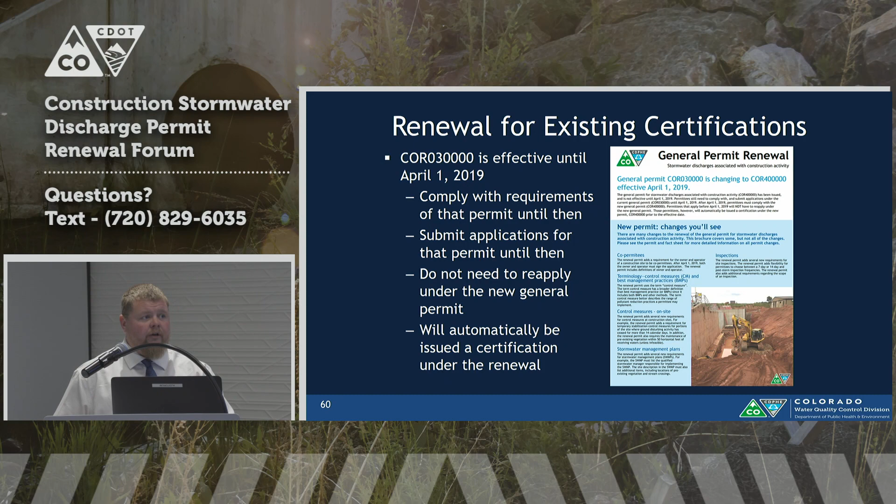So since you don't need to reapply, you will automatically be issued a certification under the renewal. Everyone will get those certifications. Will the certifications be mailed out, emailed out? Sure, yeah, we will get to that next.

So now we're going to talk a little bit about the Colorado Environmental Online Services, or CEOS. This is our online application that we now have. It's currently active for dewatering. I know there's been a lot of issues. I'm happy to hear grievances, and we'll definitely take all of that back to the office. Keep in mind that I'm a messenger here. I didn't create CEOS, and I'm not in charge of it whatsoever. But I will try and tell you as much information as I know about it, and as questions come up, hopefully we'll keep working through all of it together.

Basically, the reason we went online is, like you saw, we've got 2,400 applications per year. And while our compliance unit received additional funding in order to have better oversight and more compliance assistance, our permits unit did not. So they are limping along with basically one person who issues all 2,400 of those. The process really is outdated and isn't serving our purposes anymore. We're not able to keep up with the demand. So the idea here is, we've got limited resources, and we need to use those technological tools to help us work faster and more efficiently.

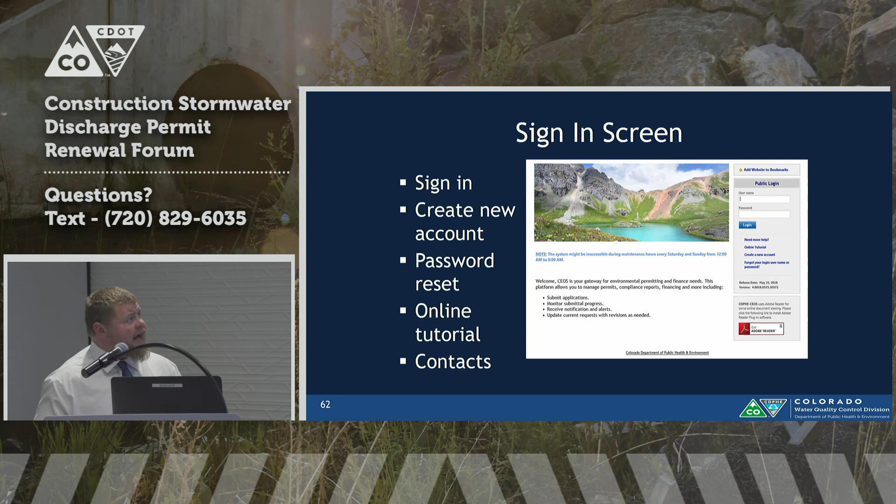So this is your sign-in screen here. You can create a new account, which is right there, the third blue one down. That's where you're going to go in order to set up your accounts. So all the permittees will need to go in and set up an account in there. You'll also want to set up an account if you're a preparer, and we'll talk about that in a minute here too. Also available on this page is your password reset. We've got a couple online tutorials, though we also have some on our website that are a little more specific, and so I would personally depend more on those. And we've also got contacts if things aren't working.

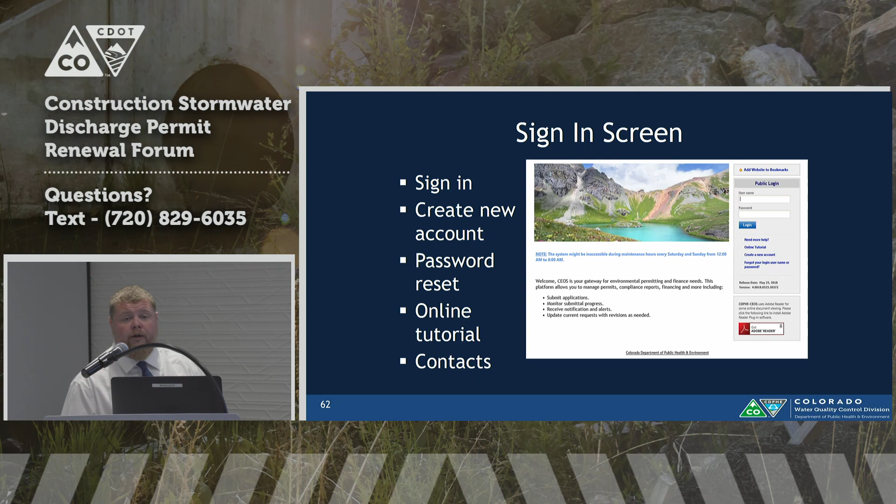So for creating an account, it needs to be created by a responsible official. And that's going to be the same as your legal contact or your permittee. Now, it has to be somebody who can sign on behalf of the company and agree to any compliance penalties. So in this situation, we're really looking at VP, general contractor, we're looking high up, director of public works. It needs to be somebody who can levy those penalties. So in this situation, we're talking not project managers. Project managers won't be verified as ROs because it's seen as they don't have the financial liability basically on their shoulders. Now, if you have companies, certain companies, where those PMs are given that amount of financial liability, then we'll need to talk through that as we go to register these. But as of right now, PMs will not be able to be ROs.

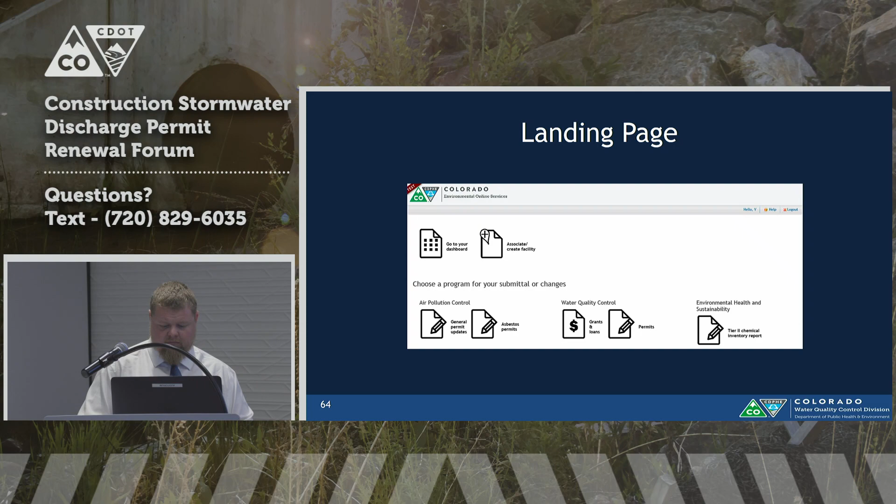So if you're going to modify the permit, will you need to pull in an owner? I do not have the answer to that question. Probably going to need clarification. I absolutely agree, clarification is needed on that for sure, and I do not have it.

So if there are 2 ROs, can either one then set up this initial facility? Yes, yes, if there's currently 2 ROs. Right now there won't be a situation where there are 2 ROs until we have new permits coming. The existing permits will only have 1 RO.

So in the situation of private projects, then you're going to have an RO with every new project, essentially, on the owner side. They're going to have to go in, create an account, and go through this. So the question is, come April 1st, will all private projects need an owner? And yes, they will.

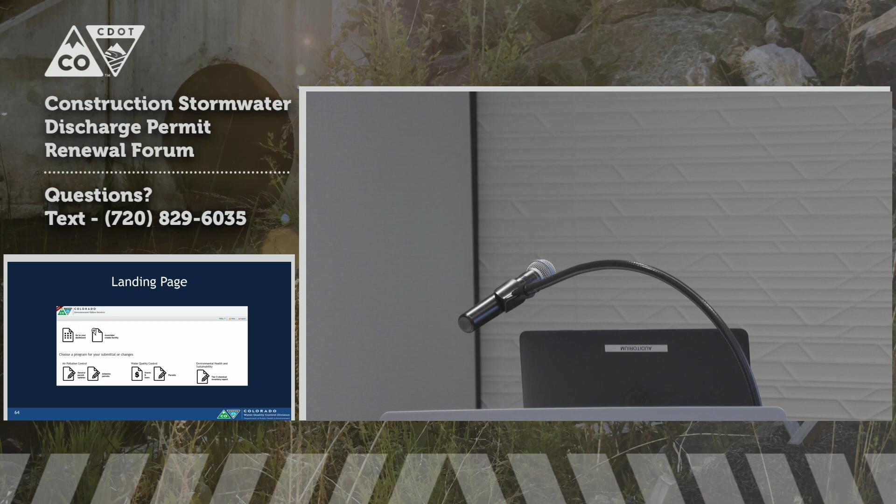So a little bit on how this works, and we won't go into too much detail on these since they're hard to see. But our dashboard here, our landing page, gives you basically 2 options at the top you want to think of or look at. One is to go to your dashboard, which will give you a list of everything once you have it all set up and where everything is at. And then the second point over here is to associate or create your facility, and so that's what we'll be doing initially.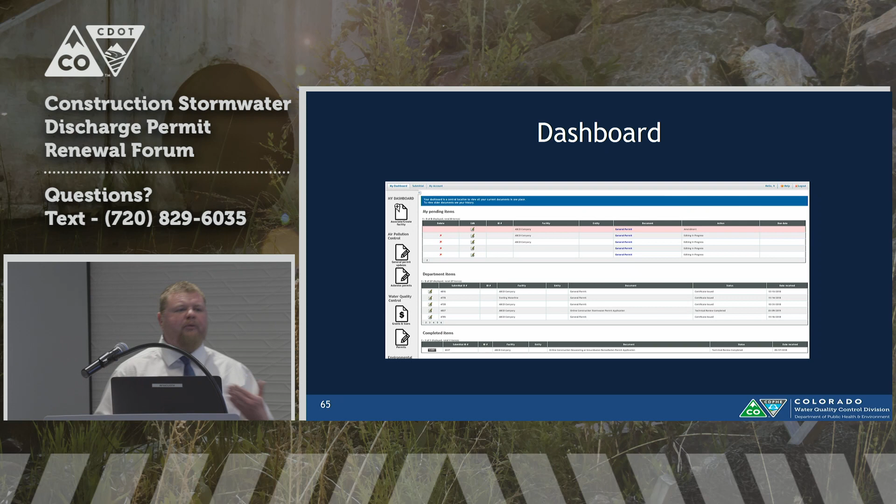The dashboard lists out everything that you've got available to you. So pending items would be maybe you've started the application, but it's not completed yet. When we get into our department items, which is the next one down, that's where the ball's in CDPHE's court, waiting for that to come back to you. And then your completed items are permits that are up and running, everything's set, ready to go. We have another option here to associate and create facilities up at the top, just to keep that in mind.

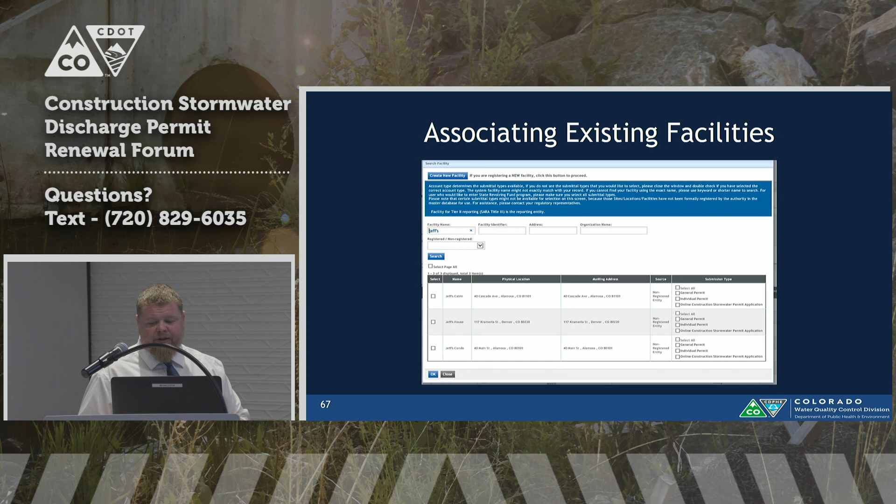So for associating a facility, once we get into this screen, we'll click that blue button, which is our associate facility. What you want to do is, you'll get an email that'll have your list of all your facilities. The facility will be pretty clearly identified in that list. Go ahead and put that same name right into your facility identifier, and that's going to find that facility for you. Then you're going to click submit down at the bottom there.

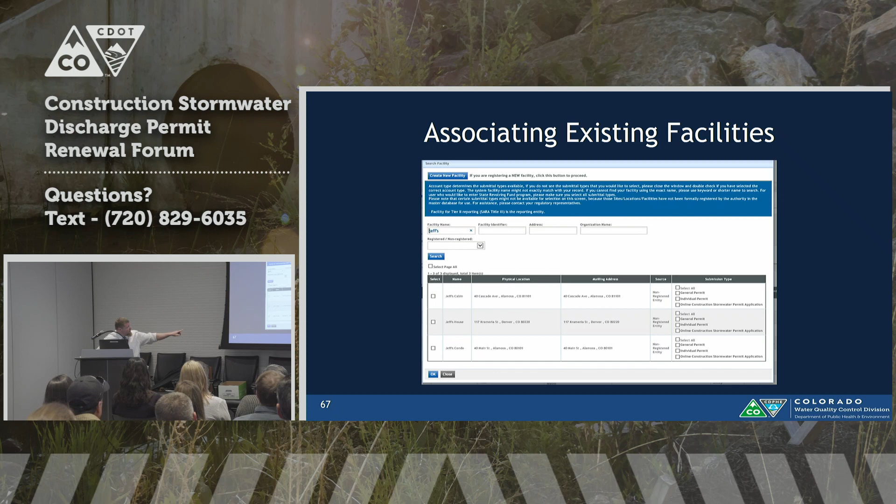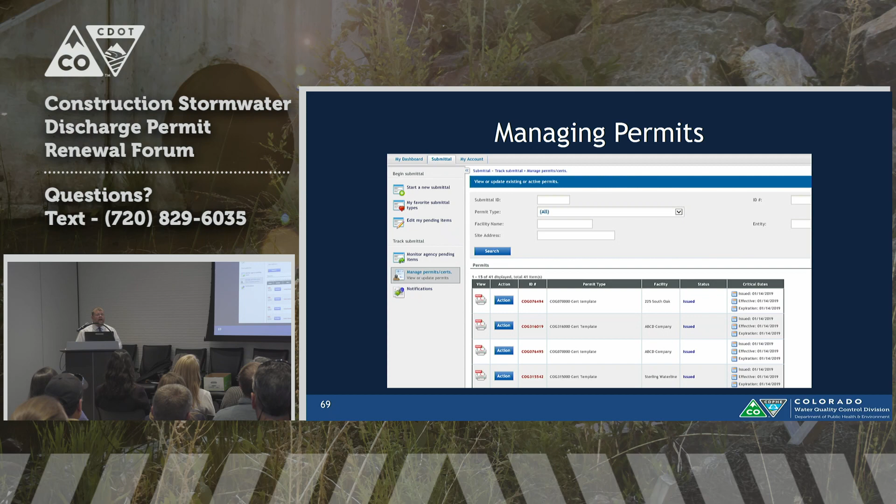Preparers will want to have their own accounts, so make sure those are set up. The RO will add the preparer using that email address. As far as once we have things set up, here's where we get into those change of contact forms, modifications, things like that. We're going to click on Action here, and that'll bring us to these additional forms, such as our change of contact, our modification, and our termination. Now those applications and forms themselves, the questions are going to look very similar, if not exactly the same, as how they're set up right now. It'll just be an online system.

So when we're applying for a new permit, that application is still in process. We've got it set up now so that we'll be ready to associate facilities that are currently existing, come April 1st, and we will have it by April 1st. That application will be together. It'll look, like I said, very similar to the current application, it'll just be online. And that dual signature is also still in development, where I assume what it will look like is one person will sign, they'll send a notice to the next person, that person signs, and then it gets kicked over to the division once you have two signatures.

There will be some way to notify that other signator that the application's ready for them. But those are all, like I said, still somewhat in development.

If you have to use personal email, I signed up as a small preparer and put in my company email. I didn't have any problems, but I'm also not a responsible official, so I haven't had to put in... I don't know, I haven't gotten that far.

But I guess I'm wondering, it's one thing to verify who you are through personal information, if you're saying it has to be that way. But these notifications, they're gonna come hopefully through your company, right? Email might be the oddball there. I don't think it has to be personal email, you can put your work email. Other information needs to be personal. I'm just thinking people might not check their personal email.

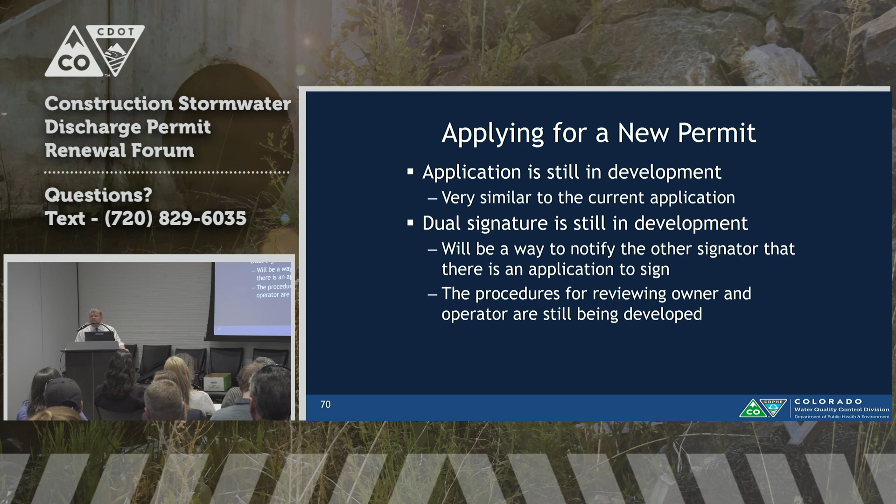From my experience going through it with Haley's help, the way it worked was the RO sent out an invitation basically associating you, or requesting you, as a consultant. At that point, the preparer had access to everything in our company, so I could access everything. They're able to do the transfers and the mods. He could assign as little as he wanted to. He assigned everything to me in that respect, but he could, like anybody in the company, just assign them to one permit. It was set up that way and it works.

You could prepare everything and then send it back to them. The comment is that it sounds like, at least in one situation, we've been able to set up that preparer who the RO then associates with the facility, and they're able to do those other pieces. That is how the system should work.

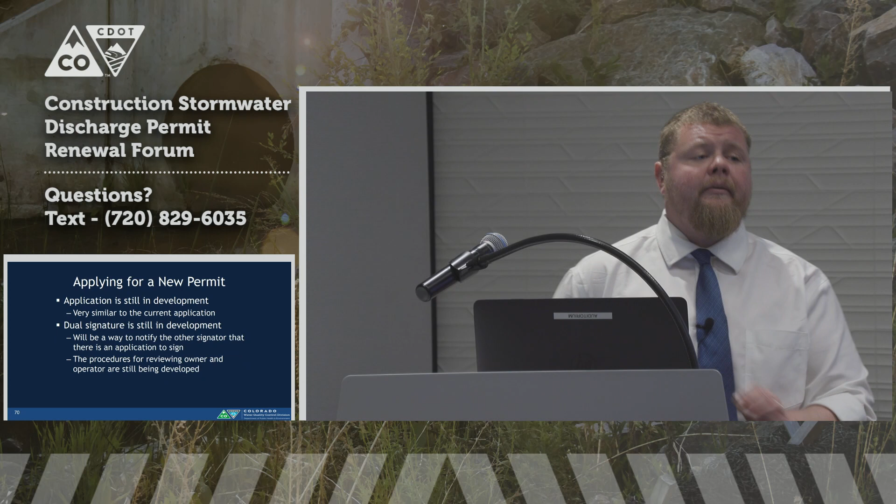Anytime an RO delegates some sort of work, or vice versa with the preparer, all those notifications are via email. It'll say in your email, hey, RO so-and-so has requested this information for you to input into the application, or whatever they want to do. So it's all via email, any type of notification they do, it's all via email, and vice versa for preparer or RO. So just to repeat, all of the notifications are via email, so you'll always get emails back and forth.

Maybe you went over this already, but what happens in a situation where it's not like a retirement, where whoever set up the account originally loses their job? Is there a mechanism for transferring that at that point? I don't know the answer to that, that's a great question. So the question is, what if the person loses their job or something like that, and we don't have pre-notice, basically, to change them in the system? I'm not sure how that will work. I would think, though, that the owner-operator side would be able to help, because you'll be able to use the other person.

We're almost done here, and then we'll have a few minutes for questions. So I wanted to get to what we have for available resources. First of all, we definitely have our... hey Tamara, can I get these handed out, please? Thanks. So obviously our website is a huge resource for folks.

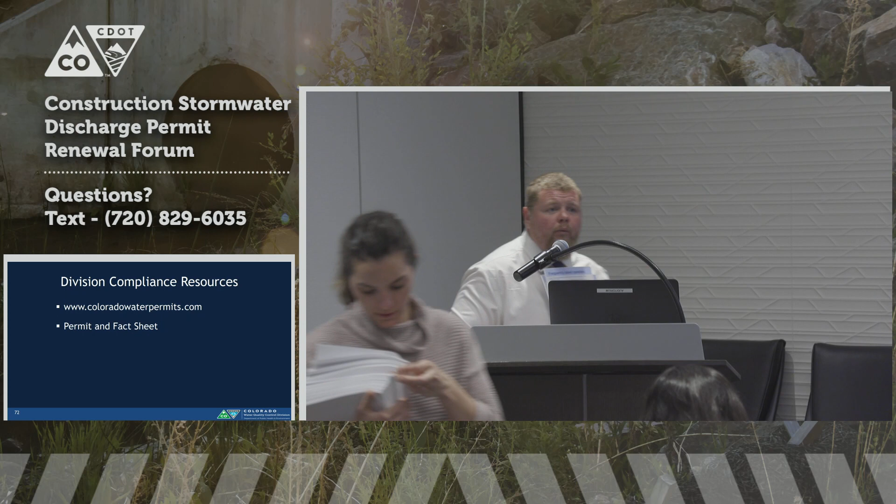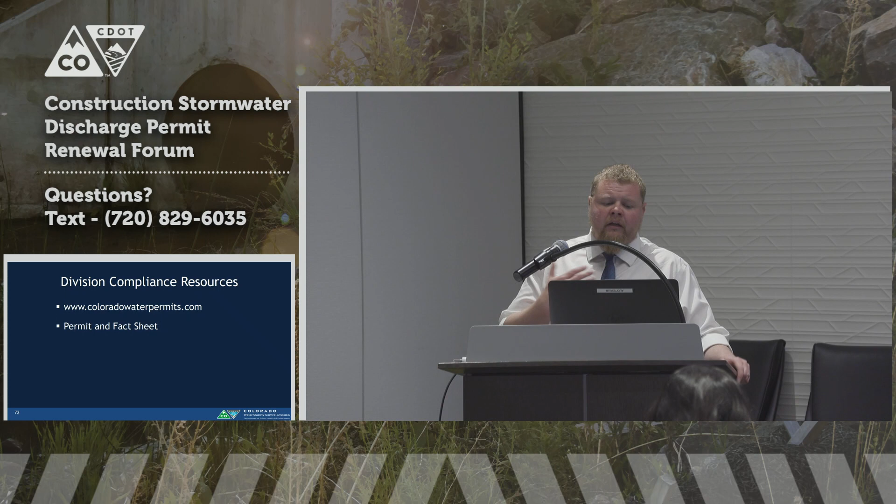We've got all kinds of guidance documents that are either up there already or will be by April 1st, such as oil and gas, final stabilization, things like that. Obviously, the permit and the fact sheet are always great resources to go to. That permit and fact sheet have everything listed out that you would need in your stormwater management plan, has all of those general requirements, so rely on that permit.

Yeah, no, thank you so much.

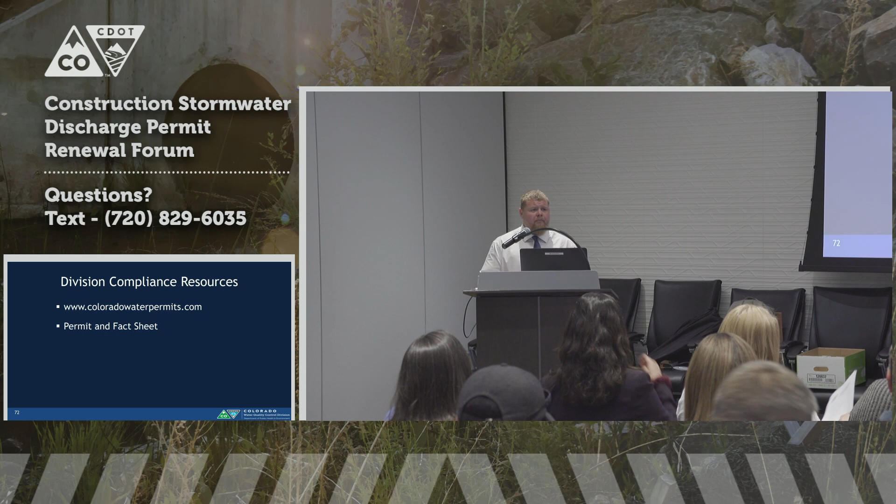Now, the fact sheet can be a little intimidating because the whole document is something like 120 pages long. But keep in mind, it's really the first 10 or 15 pages that have a lot of the information as to why decisions were made on the permit and how they were made. The rest of the document, the bulk of it, is the response to comments. Useful for sure, especially if you want to do a word search to find certain topics. But if you're going to read any part of the fact sheet, read those first 10 pages and don't be intimidated by the last 110.

So what we're passing out here now is our stormwater management plan guidance doc.

Oh, sorry, yeah, I have a quick question. About ROs and SWMP preparers. Can you have multiple SWMP preparers per location?

Mary, do you know if you can have multiple preparers on a site? I want to say yes, but I'd have to double check. I believe so, I would think so. I feel like, I don't see why not. If the RO is going to verify multiple people for a site, there shouldn't be a limit on that. We had success with the dewatering one. Actually, when we were practicing, we had 3 preparers for 1 RO. So the question was, can we have multiple preparers for one site? And yes, there's been success in dewatering doing that, and that is possible, which might be a very helpful way to manage the sites.

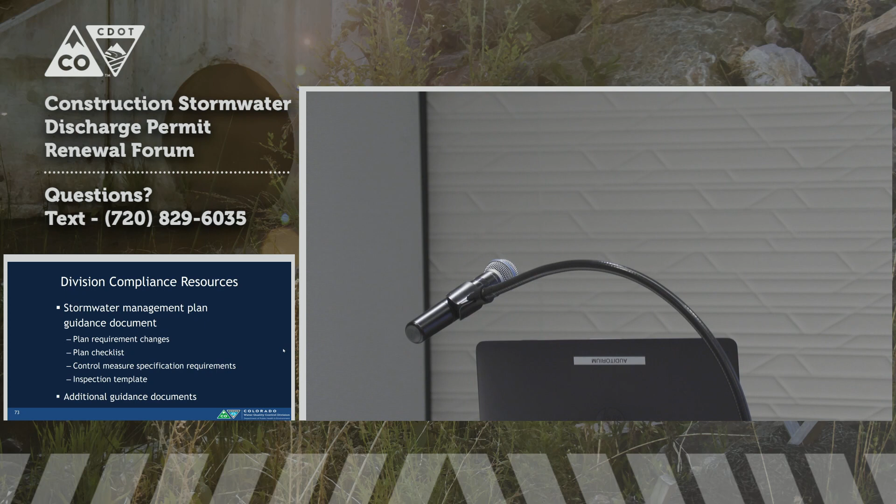Okay, let's talk about this guidance doc that just got passed out. Did everybody get one? Awesome, okay, this is a really great document for sure. The entire thing goes through all the different requirements for the stormwater management plan, with quite a bit of detail for each one.

There's definitely information on here on inadequate versus maintenance for those control measures. There's all the requirements for your inspections, and it goes into detail on the inspection frequencies as well. What I really want to point out here is the appendices in this document.

So if you go to page 21, we're at Appendix A there. This is all of your stormwater management plan requirement changes. The first part is kind of your overall general requirements. But if you get to the bottom of page 21, we start to see the changes that need to be made. So you can use this to go through and update your stormwater management plans. For example, under the site maps, it says to add your flow lines, things like that.

So that's what Appendix A is for. Appendix B is also very helpful - this is our stormwater management plan checklist. It has each of the pieces that you need to have in your stormwater management plan. We send this out before inspections for folks with our notification so they can make sure they have all the pieces there, and now you've got a copy of it too. Keep in mind this document is also on our website, and each of these appendices are bulleted underneath so you can pull a PDF of any of these documents.

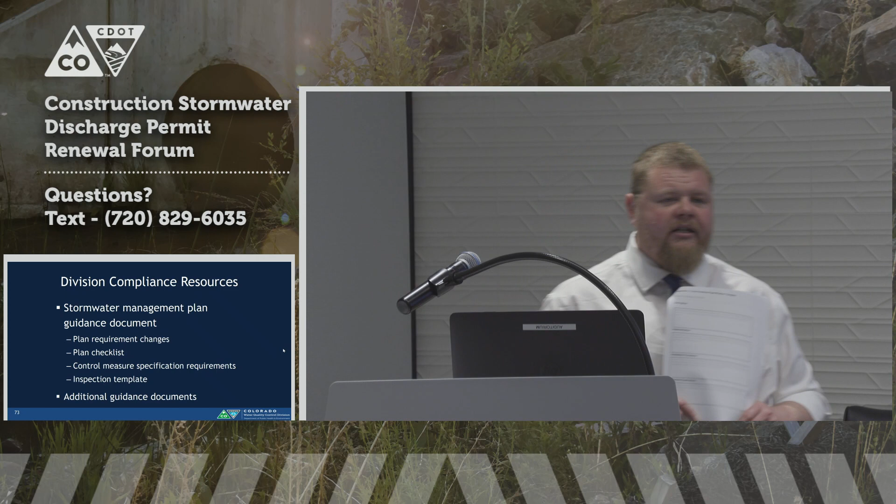So then we'll move on to Appendix C, on page 29. This is for your control measure specifications where maybe we aren't getting it from CDOT, maybe it's one of the proprietary ones, or a special one, or we don't have it in urban drainage, like cut back curb, for example. In that case, you'd want to go through and fill out this template, which will walk you through what you need in your specifications.

And then Appendix D, which is my favorite appendix, is our stormwater management plan inspection - this is your inspection template. We haven't had one of these previously for the construction stormwater sector. We just started issuing them out for sand and gravel, and I think it's a huge step forward in helping folks make sure they're looking at everything they need to in their inspection template. If you fill this out, you'll know that you're meeting all the requirements of the inspection records.

Now, I'm sure CDOT will continue to have their own form, I don't know what that number is. Paul, do you know the number of the updated form? Will it still be the 1176, just updated? Okay, great, so that inspection template is out there as well.

And like I said, we're going to have additional guidance documents available. We'll definitely take into consideration some of the ones that were talked about here today as well. And on that, does anyone have questions?

Yeah, as far as really large developments or in the oil and gas field, we'll look at it over the long haul. If it's a really large development, it's 10 years.

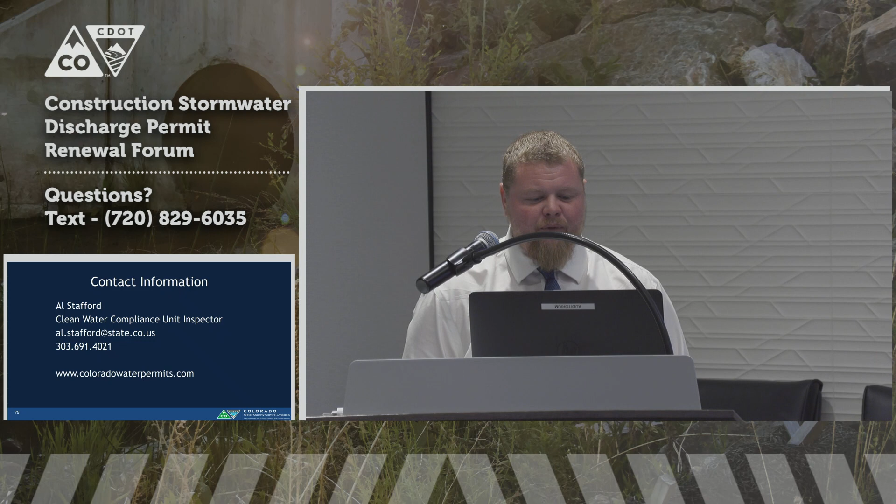Great question. So the question is, if we have a really small area of disturbance, like a utility, or maybe multiple small locations in flat land, are we looking for control measures? The answer is, it depends. Vegetation can never be our sole control measure. But if we've been able to come up with a specification for our particular area that can show it's small enough in size, it's flat enough, and we aren't seeing signs of erosion, then that sort of thing can be worked with. I've seen it before where it's like a vegetation and topography specification, using all these different factors together to show that it's adequate. But we're really talking about small area, small amount of slope, non-erosive soils - it's got to be a pretty robust specification. Great question.

Do you have an existing certification that was entered in with just an operator, not an owner? Will the new transfer just put it into the owner, or will it list it only as being an operator but still be okay with that? Whichever way they make it work, you will be grandfathered. So the question was, if you have an existing permit, will the new system just show the operator as the owner if you only have an operator? Either it will show it as both, or it will not require that owner.